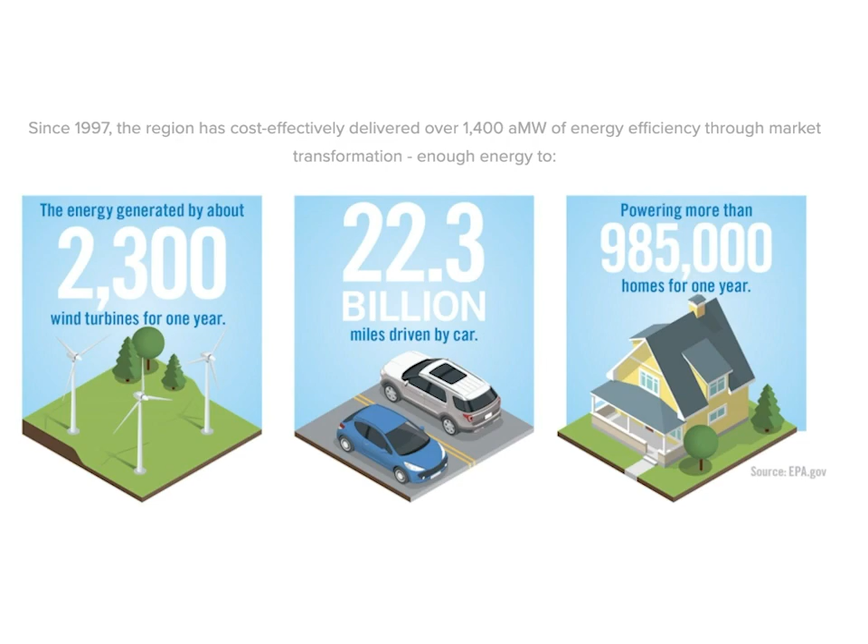Here is an overview of the course. We'll be looking at the benefits of building high-performance homes and the third-party verification when you participate in local energy efficiency programs. We'll cover the basics of building science, and then we'll dive into 10 categories of good, better, and best practices for building high-performance homes.

Towards the end, we'll show you how to explore local energy efficiency programs and potential financial incentives. And finally, we'll give you tips on implementing quality assurance procedures and techniques to help ensure your project achieves your high-performance goals.

So to cover any of the topics in great detail would require a full-day class for each and every topic. So what we'll present is a survey of the various options in the top 10 categories, and the good, better, and best spectrum of options are provided with the intention to meet all levels of experience with building high-performance homes.

And this is intended to chart a course to help you navigate some of the profound changes ahead in the construction industry. Specific information on construction details, material characteristics, and equipment selection are available by consulting your local energy rater verifier. At the end of the course, we'll provide links to additional online resources and trainings.

Our learning objectives are to identify common barriers to energy-efficient home construction, learn building science and moisture management basics, gain approaches to improve envelope design and performance, review advanced mechanical systems, lighting, and appliances, and learn how to leverage local utility programs and energy efficiency incentives.

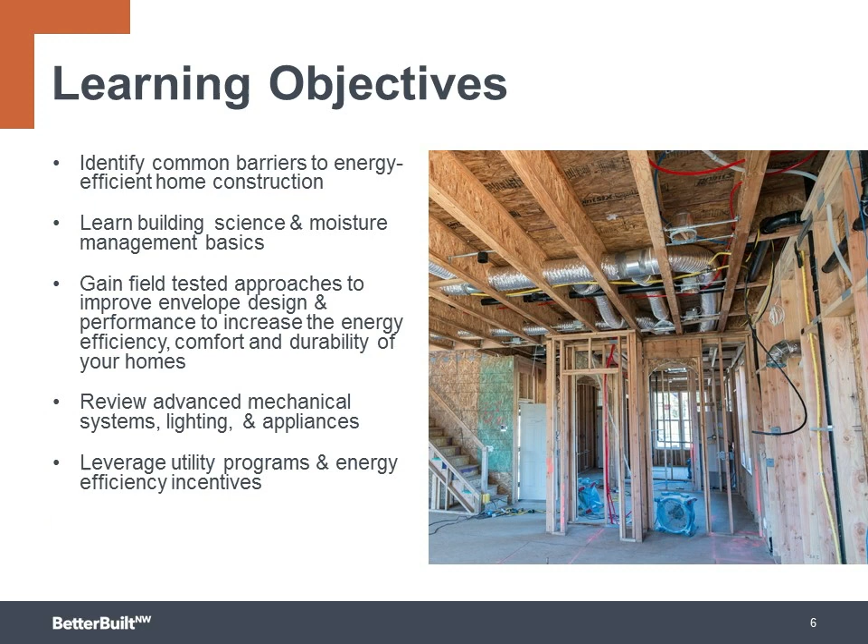Let's begin by looking at the opposite of high-performance homes, in poor-performing home scenarios, to think about why you should want to build to a high-performance level to benefit your business. What's the business case for making these changes? By taking performance to the next level, you can limit your liability and preserve your profits.

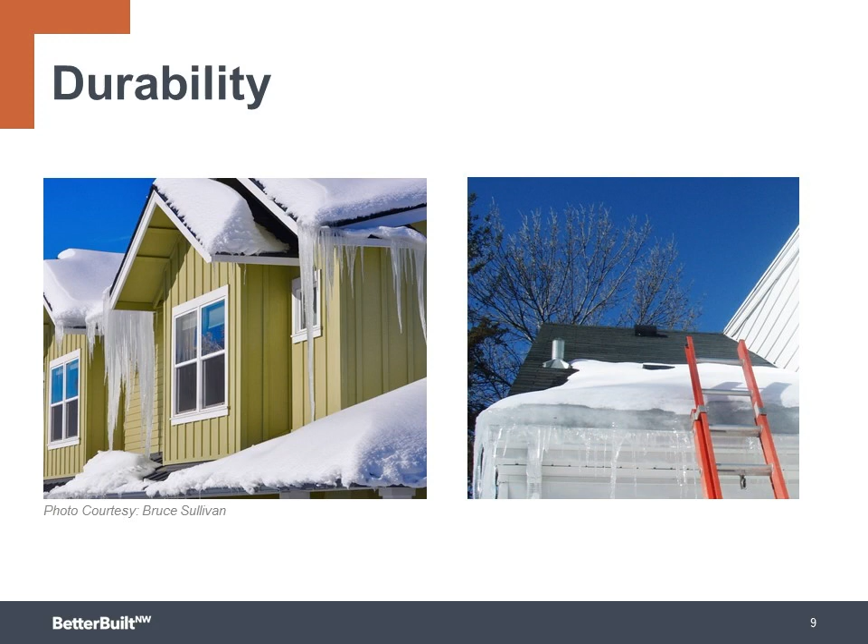Another reason to build high-performance homes is health. Unhealthy indoor air can stagnate in poor-performing homes, which may result in sick customers. Asthma rates continue to climb in the U.S. every year. Poor indoor air quality can cause this disease, and the average American spends 90% of their time indoors, and a large amount of that time is in our homes.

You want your reputation to be connected with healthy homes that provide fresh and clean indoor air. Poor performing homes can result in uncomfortable customers, and of course this will never lead to word-of-mouth referrals or positive reviews.

With today's evolved materials and building techniques, an uncomfortable home is unacceptable and totally preventable. High energy costs will also cause dissatisfaction with home buyers. Oversized HVAC equipment leads to short cycling, which can significantly lower the rated efficiency of the equipment and results in high energy bills. Why pay for this excess fuel when a well-built building shell with high levels of insulation and proper air sealing can lower the design load and allow for smaller equipment to do the job more efficiently and at a much lower cost to operate?

Housing affordability involves more than just the dollars per square foot of initial cost to build the home. When looking at the total cost of ownership, you need to consider the monthly operating cost as well, including energy bills, water and sewer bills, maintenance and upkeep, as well as location and the transportation costs of living in the home. Low-income people spend a much higher percentage of their income on energy. So lowering the energy bills to operate the home can change this equation.

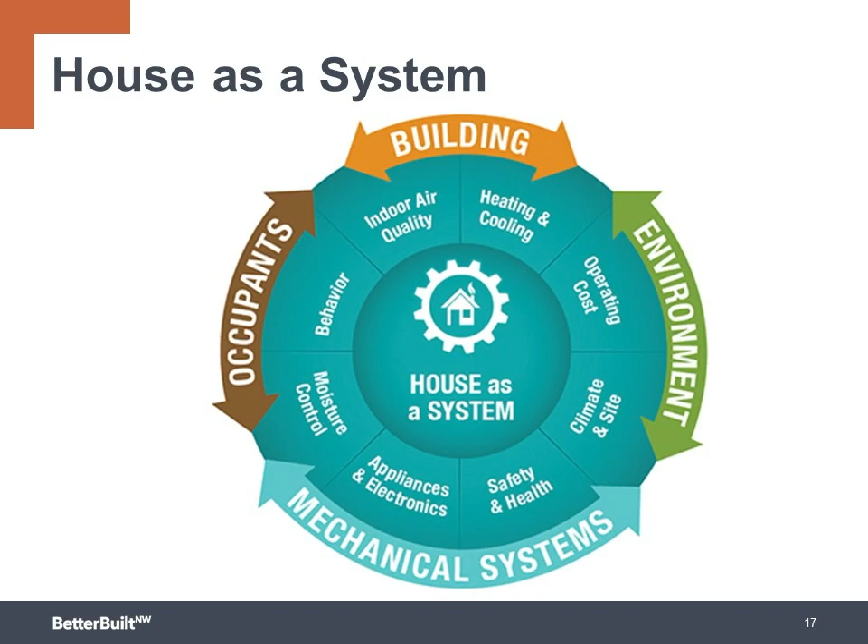Now let's look at where the market is headed, which you'll see provides more reasons to think about building high-performance homes. Buildings in the U.S. offer a big opportunity for all of us to reduce wasted energy and lower carbon emissions. Buildings use 76% of all the U.S. electricity consumed in a year and 40% of all the energy use. However, by 2030, building energy use could be cut by more than 20% using technologies known to be cost-effective today.

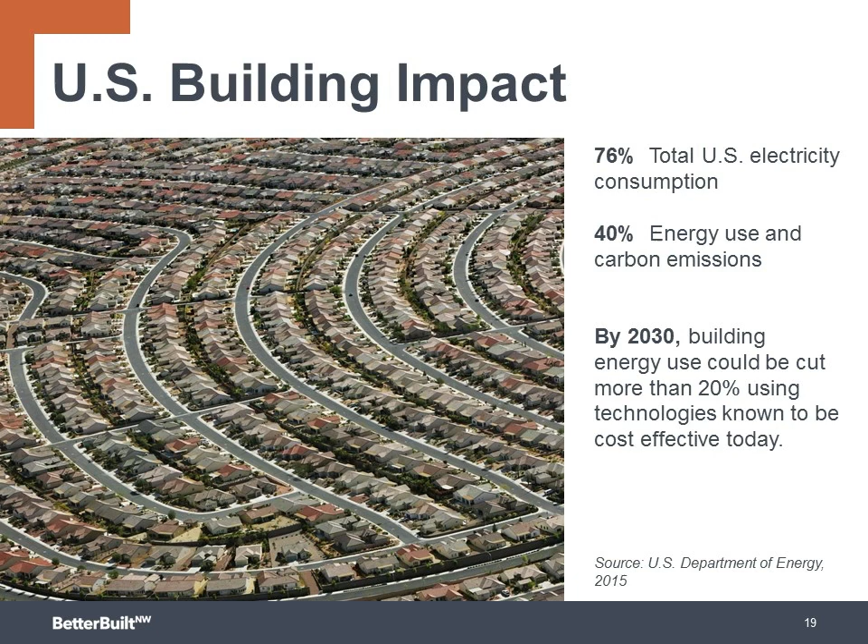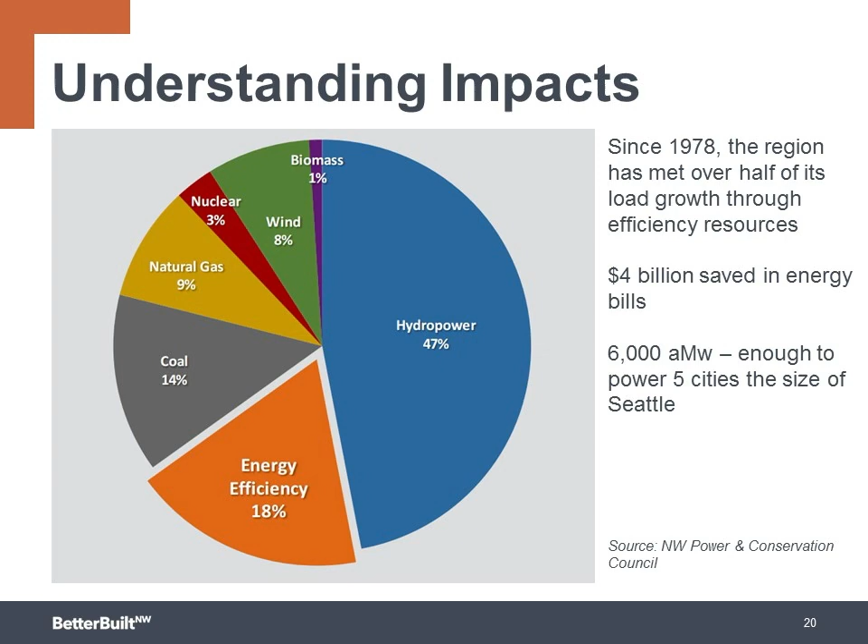Energy efficiency is also very cost-effective. The average cost to produce electricity for future load growth by saving a kilowatt with energy efficiency upgrades is less than 3 cents. Compare that to the average cost to produce electricity at around 10 cents per kilowatt hour when it's generated in a newly built coal or natural gas-fired plant. It makes sense to conserve energy for the bottom line of the utilities. Plus, if the utility companies do not have to build new power plants because we reduce the wasted energy in the system, it keeps energy costs lower for everyone.

Home buyers are identifying year after year in greater numbers as wanting energy efficiency in the homes they buy. The study asked how likely they would be willing to pay more for a high-performance home that costs more upfront but would have lower monthly utility bills, and 81% responded that they were willing to pay more for this benefit. It's also worth noting that in this example, they only focused on the dollar savings as the primary benefit, but never mentioned comfort, quality, or health, which likely would have driven these numbers even higher if these benefits were included in the stated question. And builders across the nation are responding to these buyers' expectations.

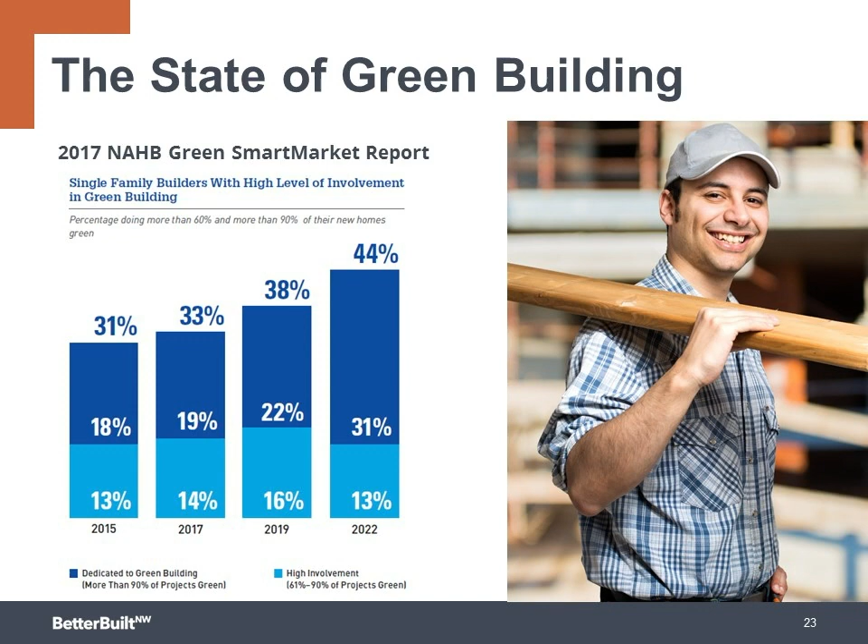In the 2017 National Association of Home Builders Green SmartMarket Report, we see steady growth of builders and remodelers who say they are incorporating green building materials and techniques into their projects. That same study also reported that the more green experience a builder has, the more they appreciate certifications, the easier they think it is to market green, and the less they perceive the incremental cost to be. 91% of dedicated green builders say customers will pay more for green homes.

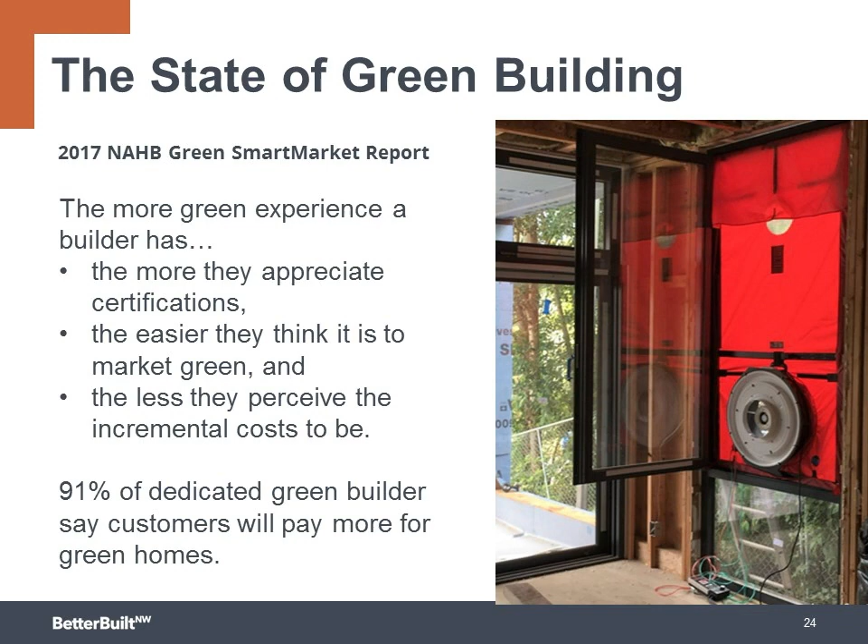The next market trend to be aware of is the zero energy home, which is a home that generates as much energy on site as it uses over the course of a year.

And these zero energy homes are being built in greater numbers across markets in the U.S. We'll look at the zero energy home in more depth in Section 10 of this training.

Policy changes are also moving the market towards high-performance buildings. In the state of Washington, the energy code cycles are evolving to require all newly constructed homes to be built zero energy by the year 2030. In Oregon, the policy changes include a goal of all newly constructed homes to be built to the US DOE Zero Energy Ready standard by the year 2023.

Additionally, the City of Portland Home Energy Score program is helping to motivate homeowners of existing homes to make cost-effective upgrades to their homes in order to achieve higher levels of performance, greater comfort, and healthier indoor air.

We're seeing the new home market moving towards higher and higher performing homes through a pull and push dynamic. As energy codes increase requirements for greater energy efficiency, they pull the market forward, whereas voluntary energy efficiency programs with cash incentives tend to push the market towards the newest, cost-effective strategies to improve energy efficiency to levels above code requirements.

We often hear that the construction industry is slow to change, and that may have been true at one time, but today's materials, equipment, markets, and just about everything is changing rapidly. Builders and tradespeople need up-to-date information and advice, and that is readily available through these types of programs.

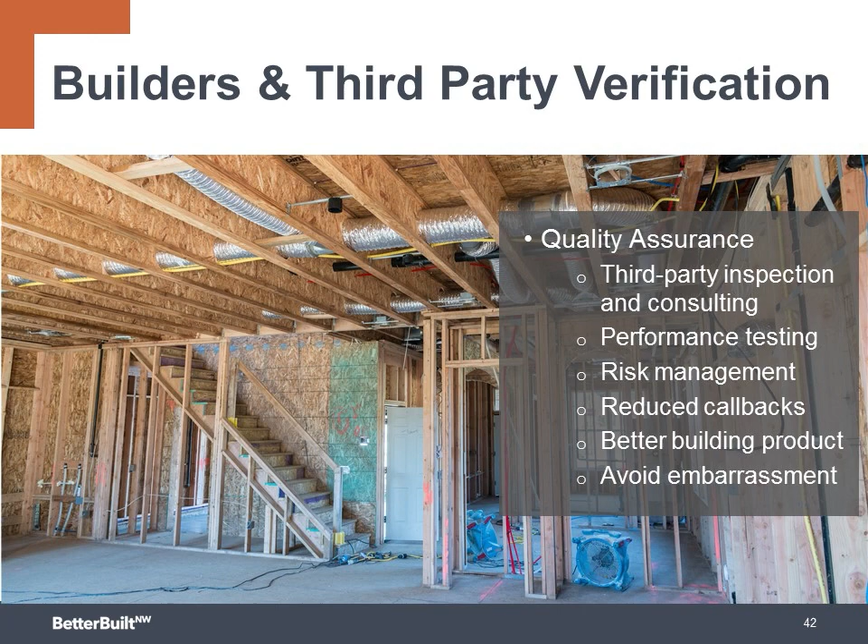Here's a short list of what the verifier does on the project. They conduct performance testing, including duct air leakage tests, building air leakage tests, and ventilation performance tests. They'll check insulation levels and quality of placement. They'll pay attention to air sealing details and durability details during construction. They'll verify ventilation operation for the whole house ventilation to ensure indoor air quality. And they'll review the HVAC system sizing documents provided by the heating contractor.

Another benefit to the builder and their sales professionals is marketing help. Green building and energy efficiency programs often provide sales and marketing collateral to help showcase the improved quality and energy efficiency of the home. Not only does this help sell the house, it also differentiates the builder's company as a leader in the marketplace.

Another example of this is in Oregon and Southwest Washington. For newly constructed homes, the Energy Trust of Oregon's EPS New Construction Program provides the Energy Performance Score to participating builders. The EPS is an energy label that can be used to make the largely invisible energy efficiency features visible when potential buyers visit the home. It shows estimated operating costs, energy use, carbon footprint, and the efficiency features built into the home. EPS is just like a car's miles per gallon rating, but for the home.

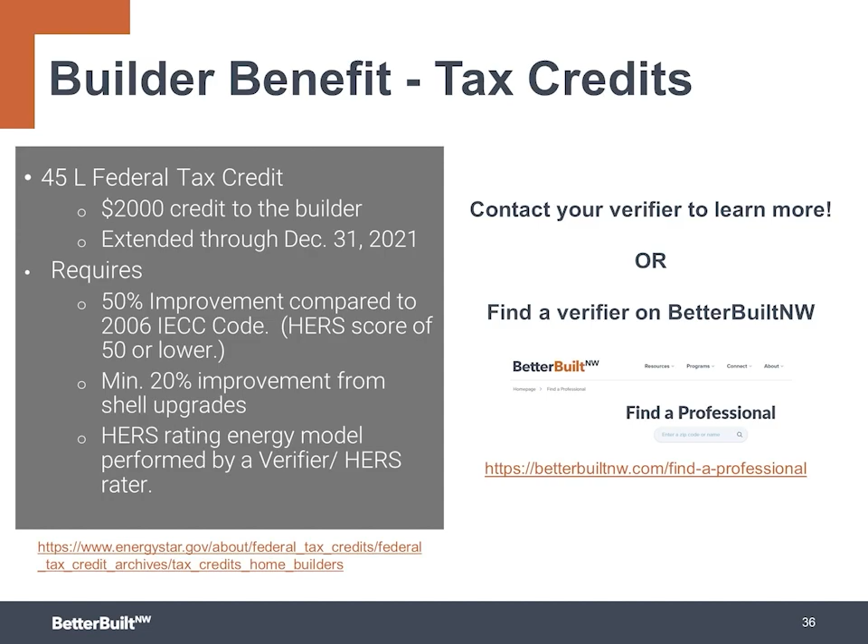In this next section, we're going to cover the building science fundamentals that govern the natural forces acting upon the home. These are the forces we want to control wherever possible in order to build a high-performance home.

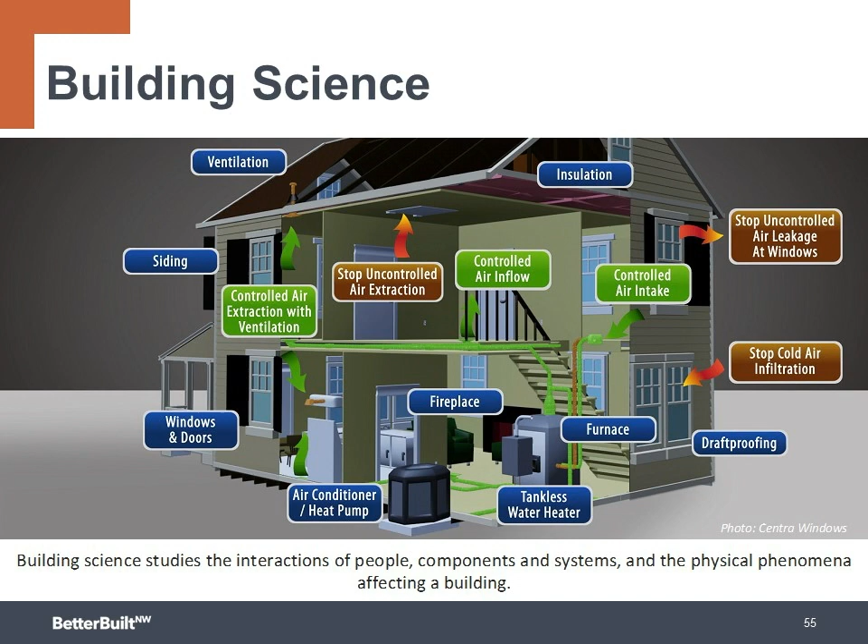So what is building science? Building science studies the interactions of people living in the structure, the components of the structure and the systems within it, and the physical phenomenon affecting the building. The laws of nature govern how heat, air, and moisture move around and through the structure. By gaining a working knowledge of these laws, we can build in better control mechanisms to manage the heat, air, and moisture movement. Let's start with the physical phenomenon that the house is experiencing.

Pressure differentials, temperature, humidity, air movement within the structure, and how all these forces affect the building and the occupants. It sounds much like the 6 o'clock weather report. Today we can expect a high of 68 with lows around 60. There'll be high pressure dominating around the ceiling with lower pressures near the foundation zones. High local relative humidity levels are approaching 50%.

There are two laws of thermodynamics that govern most of these forces, which can be restated in a very easy to understand set of basic principles. If you can remember these basic principles, you've got it. The two laws of thermodynamics in a nutshell. Apply these principles to any situation involving energy, air, or moisture movement in a building, and you should be able to predict the direction of that movement.

The first basic principle is warm moves to cold, or another way to put it is heat chases cold. This is from the first law of thermodynamics. Energy in the form of heat will always move from a warmer mass to a colder mass.

Next is more moves to less, from the second law of thermodynamics. Typically in a building, this is seen in concentration of molecules. For example, moist air with more vapor molecules will move towards drier air if given the opportunity. Of course, this has implications for how we manage moisture in the form of vapor.

Next is high moves to low. Air pressures will always move from an area of high pressure to an area of low pressure. This affects how air and moisture move through the structure.

Then there's another scientific law that we must pay attention to, Newton's law of universal gravitation. Gravity moves everything down and is key for proper moisture management of bulk water to keep it away from the wooden structural elements of the building.

So what is the one thing in common with all of these principles? The answer is movement. These laws all describe movement, and it is this movement that we focus on with building science.

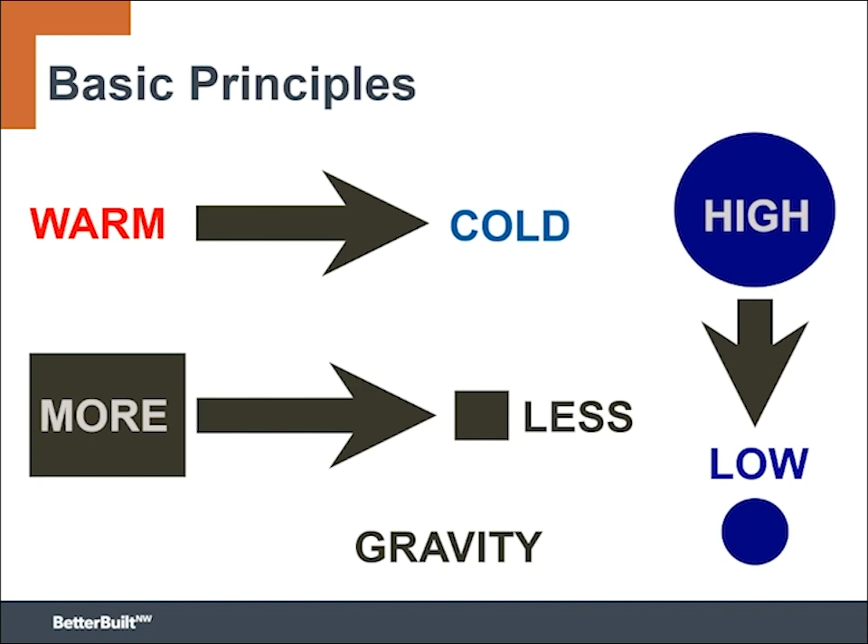Any questions on the basic principles? If not, class is dismissed. Just kidding. So let's get into some of that movement and begin with moisture flows.

Water really is amazing. It has three properties that give it unique characteristics: cohesion, adhesion, and surface tension. Cohesion is where water is attracted to water. Cohesion happens because of the 104-degree angle of the hydrogen and oxygen atoms, which polarizes the molecule and makes it very cohesive or sticky. It acts much like a magnet does with a positive and a negative side. The cohesive forces between liquid molecules are responsible for the phenomena known as surface tension. It's because of surface tension that some bugs can walk on water.

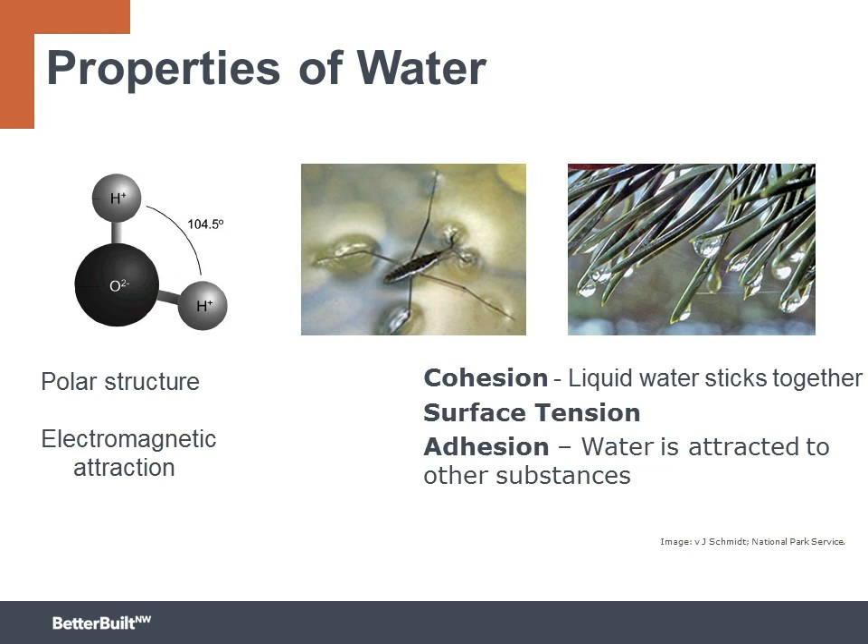Adhesion is where water is attracted to other substances. This adhesion is something to pay close attention to as we design and build systems to keep water running off and away from the building. Flashing with a drip edge is an example of a product designed to prevent water adhesion from wetting the outside of our buildings. Kick-out flashing, which is designed to direct roof runoff away from a sidewall and direct it into the gutter, is another good example. What are the ways that moisture can flow?

Liquid water can move by gravity, but it can also move by pressure differences, the high moving to low. Liquid water can move by capillary action, and that's the ability of liquid to flow against gravity, where liquid can spontaneously rise in a narrow space like a thin tube, or in porous materials such as paper, or in a building through concrete.

Water as a vapor generally moves in two different ways. Water vapor is either transported through air movement, or it can diffuse through solid materials, molecule by molecule, through the pores of that material.

We need to keep our structures dry to prevent decay. Wood-destroying insects and organisms need all three of these conditions in order to thrive and damage the building: temperature needs to be warm, there needs to be available food, and there needs to be available moisture. If we take away one of these conditions, they will not be able to take up residence and cause decay.

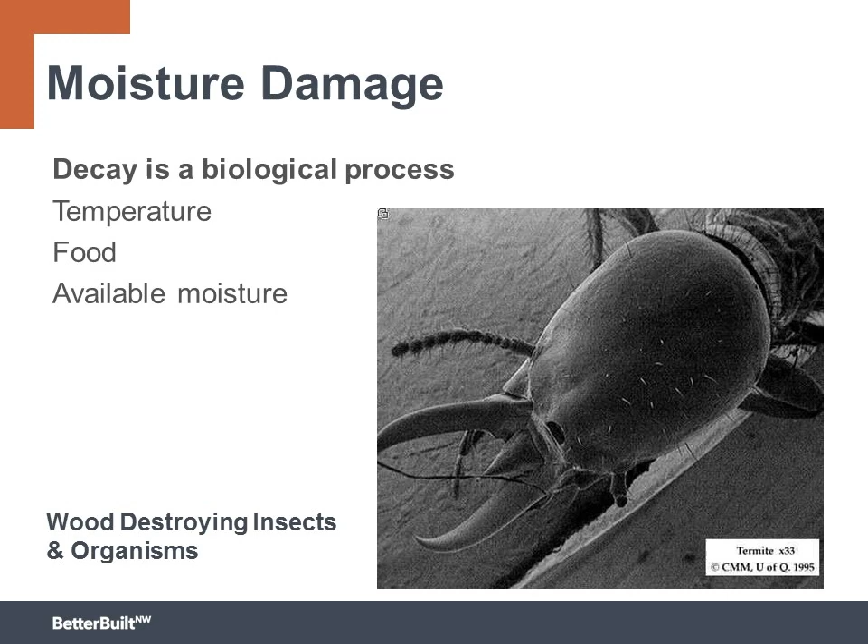Temperature varies considerably, plus we humans like to be warm, so that one's not the best choice. Food is what most of our buildings are made of. Wood is our structure, but to the decay organisms, that's dinner. So that leaves moisture as the best candidate for effective regulation, and why we spend so much of our effort to keep our buildings dry.

So how much water is too much when we want to prevent decay? Fiber saturation is the level of moisture content where the cell walls of the wood are holding as much water as they can. Water held in the cell walls is called bound water, while water held in the cell cavities is called free water, and as the name implies, the free water is relatively accessible as a source of water for decay. So decay can generally only get started if the moisture content of the wood is above the fiber saturation point of 28% moisture content by weight.

Wood does have a buffering ability where it can absorb and store moisture, then release it during dry periods without harm to the wood, as long as the wood does not reach the 28% saturation rate and remain saturated for long periods, creating conditions for insects, mold, or fungus to begin decay.

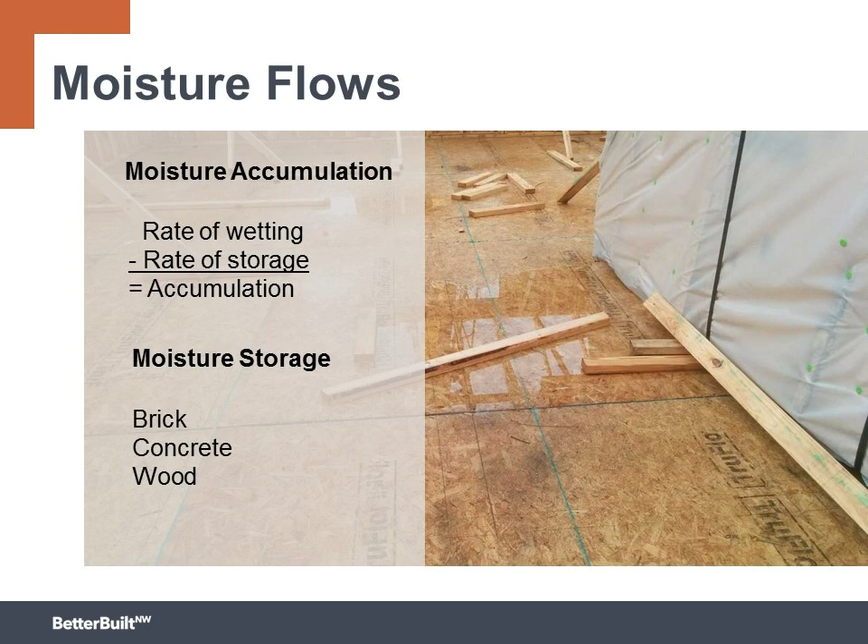So building structures that allow for drying is crucial to long-term durability. That water storage capacity of wood, acting as a buffer for short periods of time, can add up to be quite a bit of water. A 2,000 square foot wood-framed house can store and release up to about 50 pounds of water.

You can use a pin-type moisture meter to measure the wood moisture content at the time of construction. It's important to measure the structural framing prior to insulation and sheetrock, and we want the moisture levels to be optimally below 19% before cover. All builders should own one of these and use them on every building prior to cover. Not only is it best practice, it's required by the Oregon Residential Specialty Code for those building in Oregon.

For bulk water management, we use the WRB, or weather resistive barrier, under the siding to keep the walls dry if wind-driven rain or snow hits the walls and migrates behind the siding.

To take that protection to the next level, many builders are adding a rain screen detail behind the siding. By installing furring strips between the WRB and the siding, a drainage gap allows for any wind-driven water that penetrates the siding to drain quickly down and away from the wall.

Another way to build a rain screen is to use a WRB product that has the offset built in, with dimples, mesh, ribs, or something similar to create the drainage channels.

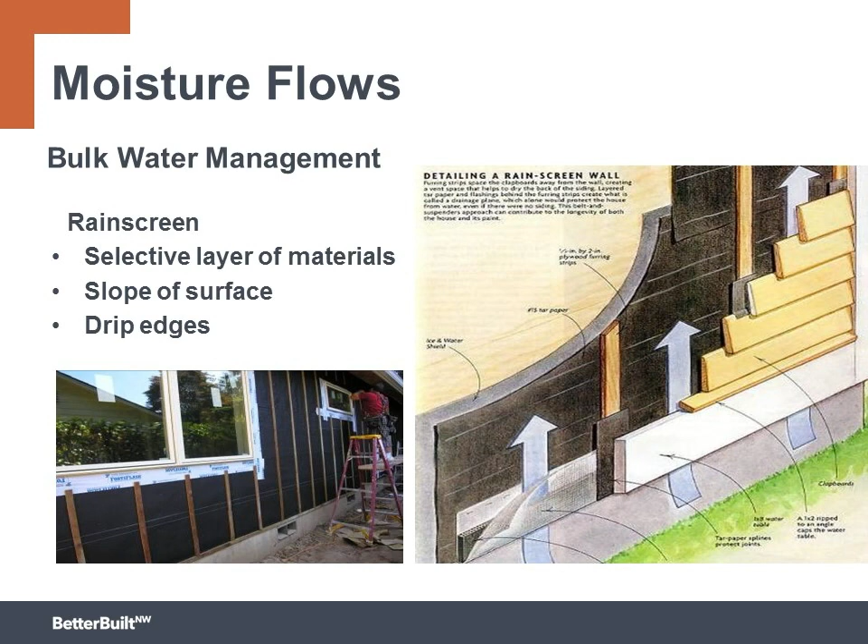With the addition of a ventilation gap at the top of the rain screen cavity, you can make a ventilated rain screen. This gives a secondary level of drying potential because now air can flow up through the rain screen gap and dry out moisture even faster. This detail can help the interior section of the walls dry faster if any moisture penetrates the wall in the future.

Then there's the capillary action we need to guard against, which again is water molecules moving through porous materials. This moisture flow is powerful and can even defy gravity to move water upward, and this is why capillary breaks are required between concrete and wood. Without this detail, moisture could wick up from the concrete into the wood and cause decay if the soil in the location is wet.

When it comes to water in its vapor state, we need to guard against the two ways it can move: by diffusion or by air movement, also known as convection. By diffusion, vapor molecules can travel alone, and vapor will diffuse through permeable materials, passing molecule by molecule through the pores of the material.

As we choose materials that make up the layers of our building assemblies, we need to understand the permeability of those materials. The perm ratings will tell us if the material is impermeable, semi-impermeable, semi-permeable, or permeable, as we can see in this table.

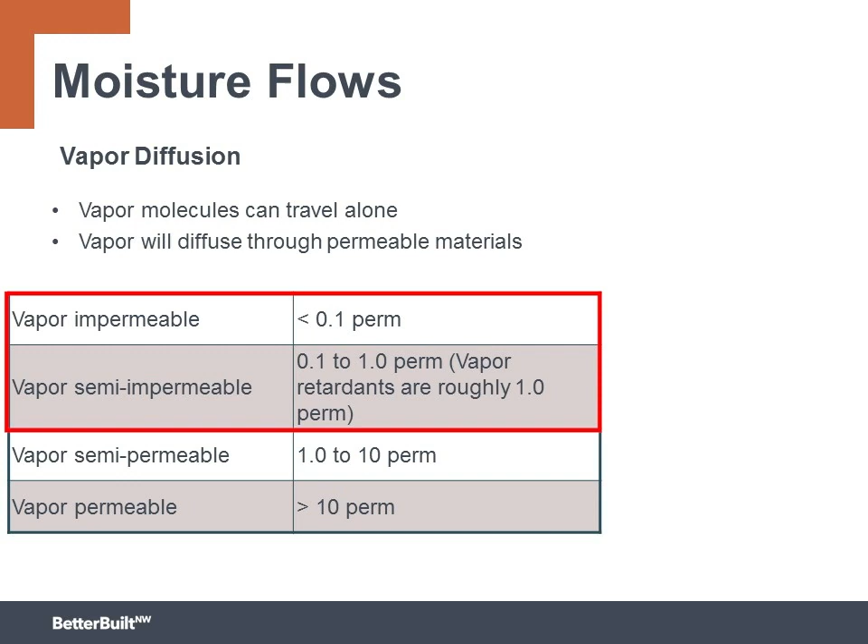Vapor retarders, installed on or just inside the interior layer, usually fall into the impermeable or semi-impermeable category, depending on the climate zone. The vapor retarder is used to guard against vapor diffusion of moist indoor air to keep it out of the wall cavity.

However, when we start choosing materials to be installed on the exterior of the building, it's best practice to choose a semi-permeable or permeable material in order to provide drying potential to the outside. This can safeguard the wall assembly in the future in case any vapor does enter the wall from diffusion, air leakage, or if you have a bulk water leak at a window or something like that.

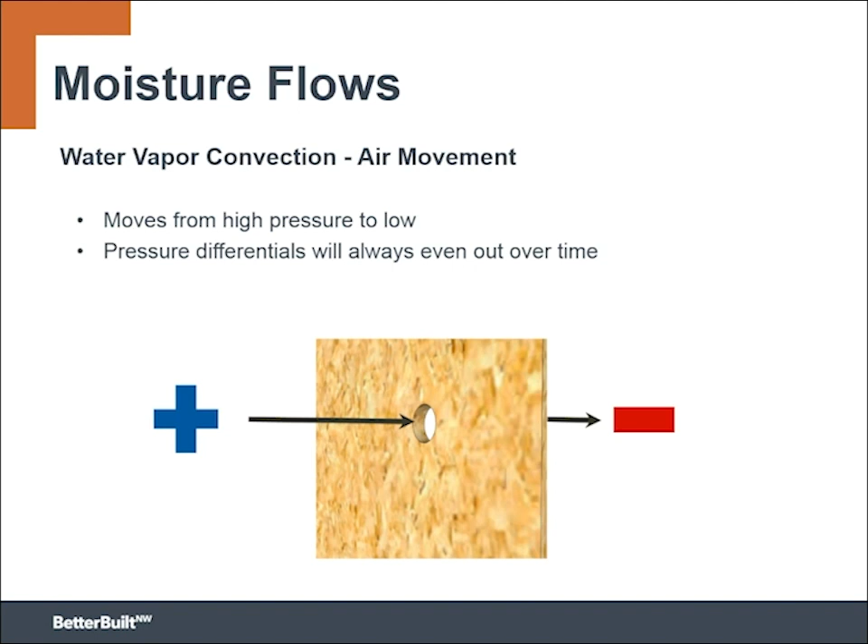We also need to guard against water vapor convection. That is vapor moving along with air molecules, which will flow from areas of high pressure to low pressure, one of our basic principles. The pressure differentials will always even out over time, and that is because water vapor can hitch a ride along with the air molecules moving from high to low through pathways like cracks, gaps, or holes in the air barrier. So air sealing the building shell helps increase energy efficiency, but it also protects the building structure from potential moisture damage.

So clearly we need to protect the building from both vapor diffusion and vapor convection. Which of these two forces poses the greater threat?

Well, a leading building science expert, Building Science Corporation, conducted a lab experiment to measure the amount of moisture that could penetrate a wall over the course of one heating season. They ran two simulations, one for diffusion and another by convection. For the first, they used a full 4x8 piece of sheetrock and subjected it to simulated conditions that you would find in a typical home of 70 degrees Fahrenheit and 40% relative humidity levels.

After the heating season, they measured about 1/3 of a quart of water had migrated through the sheetrock to the interior cavity of the wall. So diffusion can add up some water content over time.

The second wall test again used a full 4x8 piece of sheetrock, subjected to the same 70 degrees and 40% relative humidity conditions. But this one had a 1 square inch hole through the sheetrock and positive air pressure that can be found in houses, conditions that would cause air leakage through that hole.

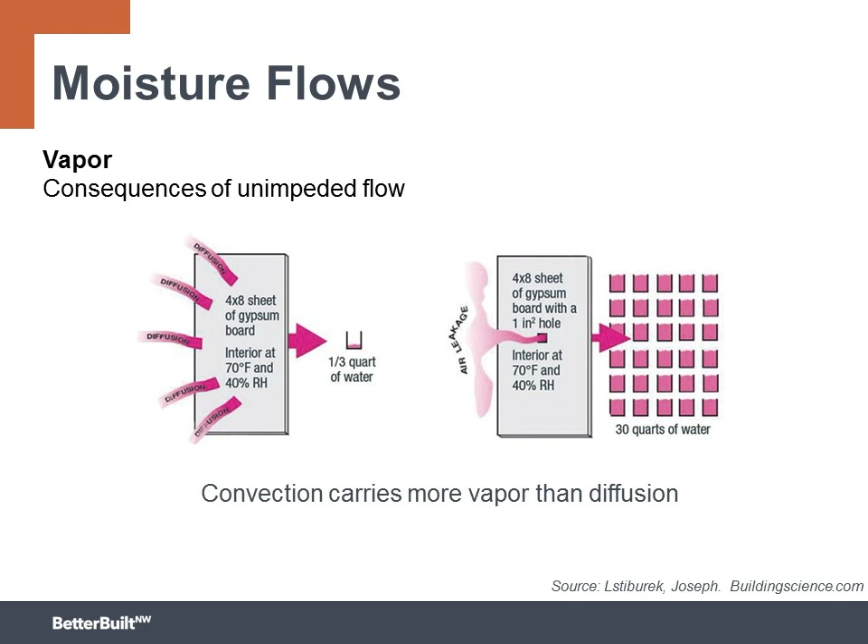What they found after one heating season with air leakage was the amount of water that migrated into the wall was 90 times greater, with 30 quarts or 7.5 gallons of water that was able to enter the wall. So air leakage is a far greater threat to the long-term durability of the structure, and air sealing is key to safeguarding the wood in our building assemblies.

So next up is our vapor quiz. What is lighter, dry air or humid air?

We'll have a look out the window up to the sky, and the clouds we see show us that moist, humid air is actually lighter than dry air. It kind of seems to defy common sense, but the reason that happens is air in our atmosphere is 78% nitrogen and 21% oxygen, and nitrogen is quite heavy at the atomic level, especially compared to a water molecule. Nitrogen is at 28 atomic units and a water molecule is 18. So as the lighter vapor molecules enter the air, they rise to the top and they displace the heavier, drier air with all of that nitrogen, and that sinks.

So what are the implications in our structures? Holes in the air barrier up high are going to be more vulnerable to vapor convection. Think, for example, recessed can lights in a kitchen cathedral ceiling. You don't want air leakage happening there. There's going to be moisture in the air from the cooking activities, and there's going to be a driving force up at the ceiling plane, and that's likely to enter into the building assembly and cause damage. So you don't want air leakage anywhere in the structure, but you really don't want it high in the structure.

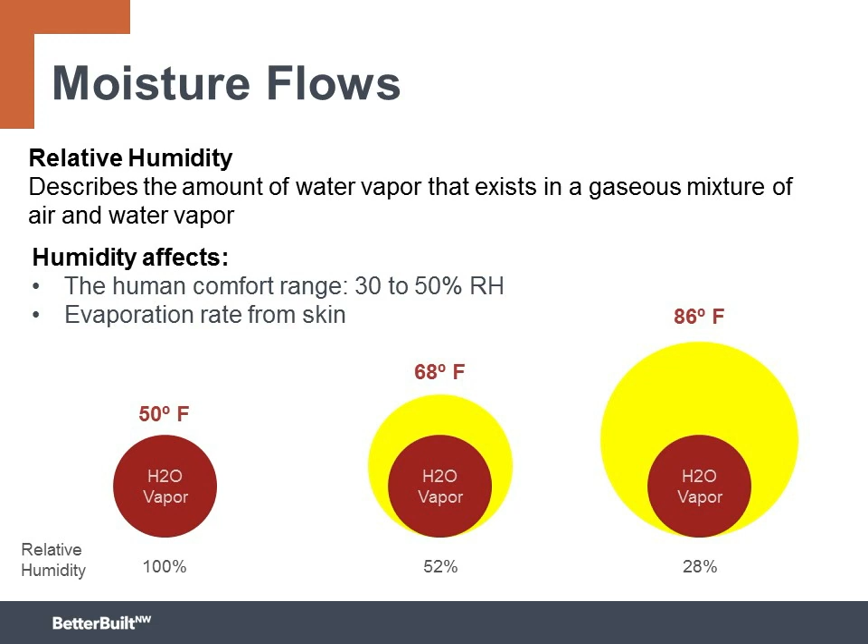The optimum relative humidity that we'd like to keep our homes at is between 30 and 50%, and this is where we find it most comfortable and healthy. Above 50 or 60%, we can start seeing condensation in cold places that usually gets noticed when mildew or mold starts growing.

As we wrap up the building science section on moisture flows, we have seen there are many ways water can cause problems for our structures, but the solutions for controlling the moisture are available. We simply need to choose the right materials and install them correctly to safeguard the structure and build a high-performing house. We also need to make sure to use materials that allow the building to dry out when conditions provide drying potential.

In this section, we're going to look at heat and energy flow, as well as insulation strategies for managing this movement. As we begin to talk about managing energy in the building shell, we can start by looking briefly at the first and second law of thermodynamics.

These laws govern how energy moves throughout the building, as well as into and out of the building, depending on the season. Remember, these laws are the basis for our basic principles: warm moves to cold, more moves to less, and high moves to low.

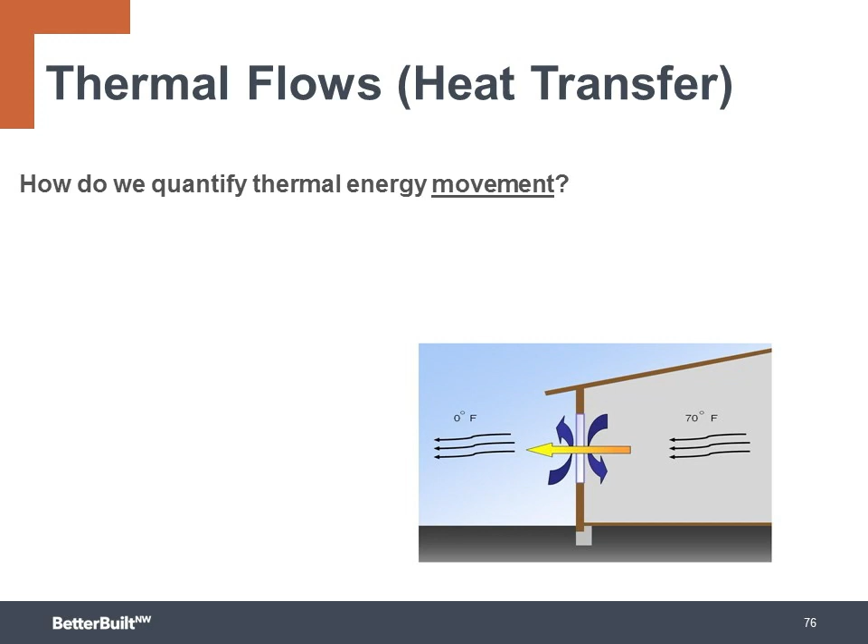Calculating heat transfer through the building shell is a fairly straightforward formula. Heating contractors perform this calculation whenever they do a heat load calc on a building using ACCA Manual J. To do this, we need to know how fast the energy will flow through an assembly. This rate of heat transfer is called thermal transmittance, expressed mathematically as a U factor.

The most common place to have seen a U factor is on a window sticker. U factors of windows tell us how fast heat transfers through the window and its frame. So we can use the overall U values of the building enclosure to determine how fast energy will transfer through it. The way to do that is to multiply the U factor by the area of the building shell and the difference in temperature outside and inside the conditioned space.

The result of this equation is the heating load. If we want to calculate the heat loss, we simply multiply the heating load by time elapsed. The important thing to remember about the U factor is that it's telling us about heat movement - it's energy in motion. In order to slow down that heat loss or gain, we need to use a barrier to interrupt the energy movement.

Insulation is how we do that. The ratings of insulation products, expressed with R values, tell us how well the insulation slows down the energy movement. R stands for resistance to heat flow, the opposite of the U factor, both in our buildings and mathematically. The R value is 1 divided by the U factor.

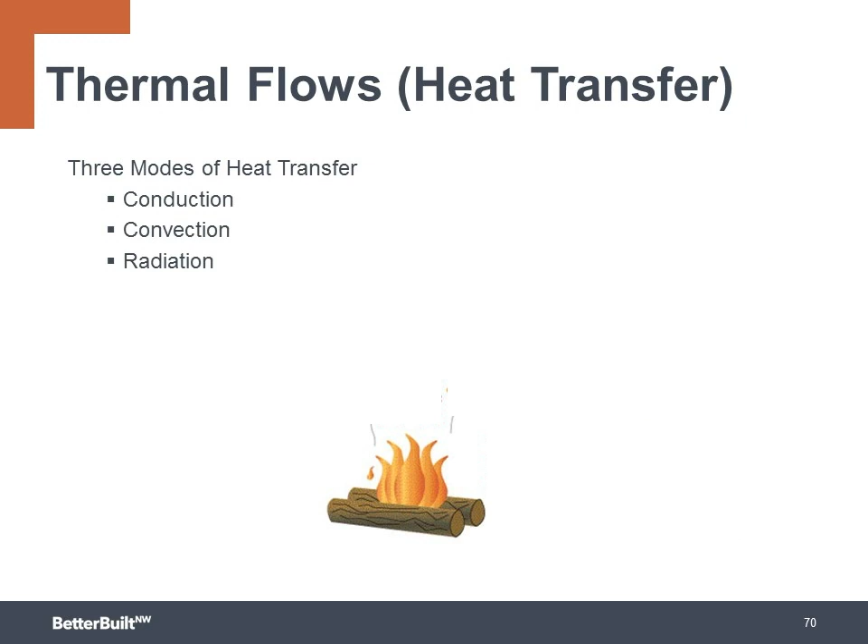There are 3 modes of heat transfer: conduction, convection, and radiation. Conduction is when heat is applied to a solid material, then it moves through that material to the colder parts of the material.

Convection is heat moving with the help of other molecules, which can either be a gas or a liquid. And we're quite familiar with convective heat flow using a gas, and that's with air molecules. The heat warms the air particles, and then they rise when there's no other outside force to move them. And this is why most people think heat always rises, but it's not always true. Heat can move sideways or down. It's actually warm air that rises.

We can see this demonstrated really well in a 2-story home where the second floor can get uncomfortably hot in the summer months. Radiation is heat moving electromagnetically with invisible waves of energy. Sitting in front of a fire, like in this example, we can feel the heat radiating sideways to our hands. And it works by line of sight too.

When it strikes an object, there's a shadow behind the object, and most of the heat energy is absorbed by the object that's getting the radiation. Think of when you're at a campfire on a cold night, and you're warm in front, but your backside continues to get colder and colder, and eventually you need to rotate yourself to try to even out your comfort.

So let's look at each mechanism of thermal flow in more depth, starting with conduction. Thermal conduction is the movement of heat through a solid material. When the solid is exposed to a heat source, the molecules are activated or excited by the heat and then transfer that kinetic energy to the adjacent molecules. It continues like this with a domino effect through the material until it reaches the cold side, or what's labeled heat sink in this animation, and the heat will then radiate away.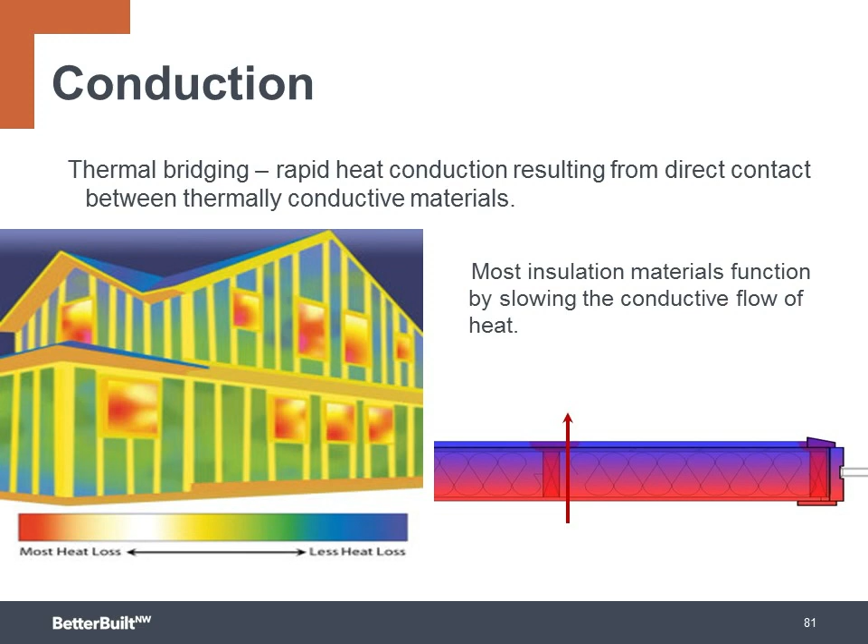So to build a higher performing home, we need to minimize these thermal conductors that span from the inside conditioned space to the outdoors. Thermal bridging is a term you may have heard that describes this conductive heat transfer in a building.

Radiation is energy moving as invisible electromagnetic waves. The energy is emitted nearly at the speed of light from a heat source. It moves in all directions until it hits an object, which then absorbs the heat. The object also creates a radiant shadow behind it. Radiation can work to our benefit for heating systems like radiant floor heat. But it can also cause some heat loss if we have open gaps in the insulation within our building assemblies.

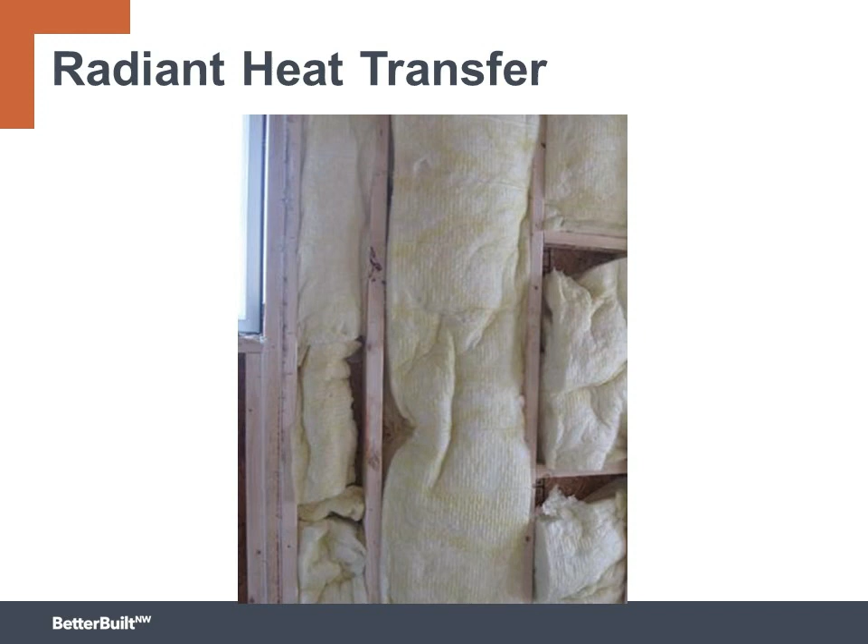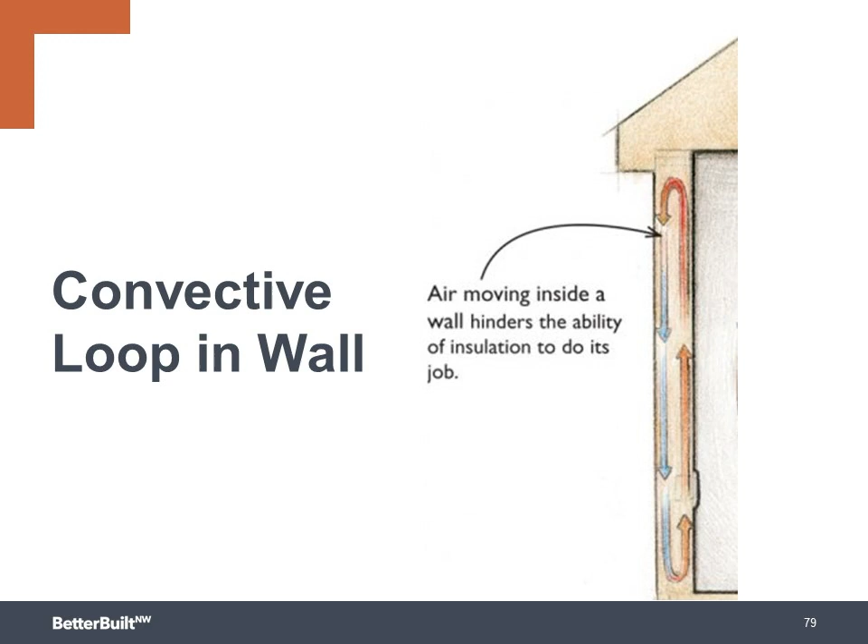Convection is the transfer of heat by moving gases or fluids. In a home, of course, this gas is going to be air. It can act like a conveyor belt to move heat from a warm source to a cold heat sink. When this happens inside of a wall cavity, it will move heat out of the conditioned space in the winter and heat into the conditioned space in the summer, wasting energy for decades. And being inside of a wall, it's very unlikely that anyone will notice that air movement.

So how do different building materials stack up for R value? Here's a list of insulating R values per inch. And remember, R stands for resistance to heat flow, the opposite of the U value, the speed of the heat flow. So still air has an R value of 6. And we often talk about creating a dead air space in the building cavity for insulation. And this is why air is a great insulator.

Of course, air that's not moving has a high R value per inch. Some foams achieve an even higher R value by trapping special insulating gases inside the foam as bubbles. Fiberglass and cellulose achieve respectable R values if they're installed correctly to ensure there's no gaps and air is not moving through them. Again, we see wood has an R value of 1 per inch, but it's a fraction of what all the insulation materials can achieve. Concrete and soil have virtually the same low R value. And finally, we see steel with the least amount of resistance to heat flow.

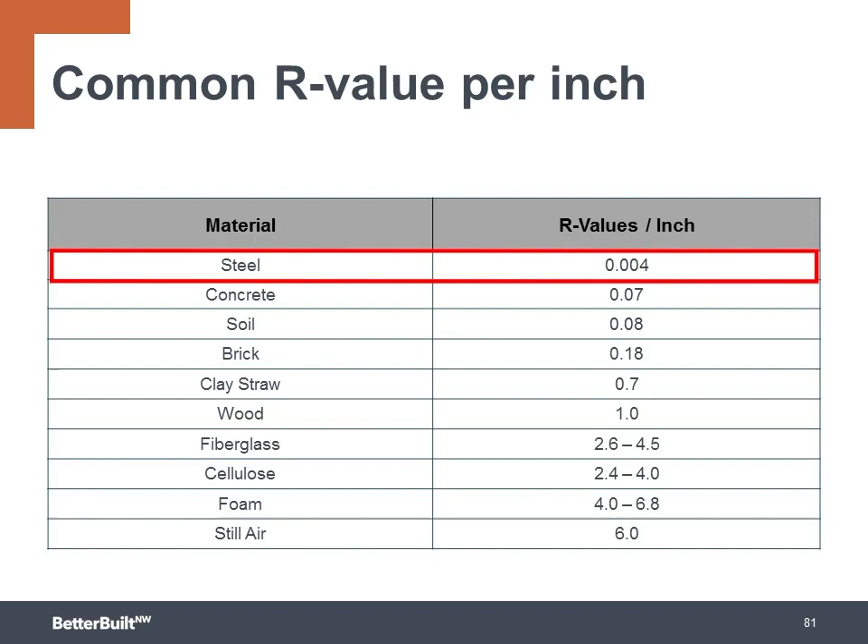So let's get into the different types of insulation. The fiber-based materials we use for insulation are fiberglass, of course, cellulose, rock wool or mineral wool, and less typical but viable is cotton insulation or wool insulation. And the fiber insulation products can be installed a number of ways depending on the product, from loose fill blown in, batts and blankets, blown-in systems like BIBS, Spider, or dense pack, and open cavity spray.

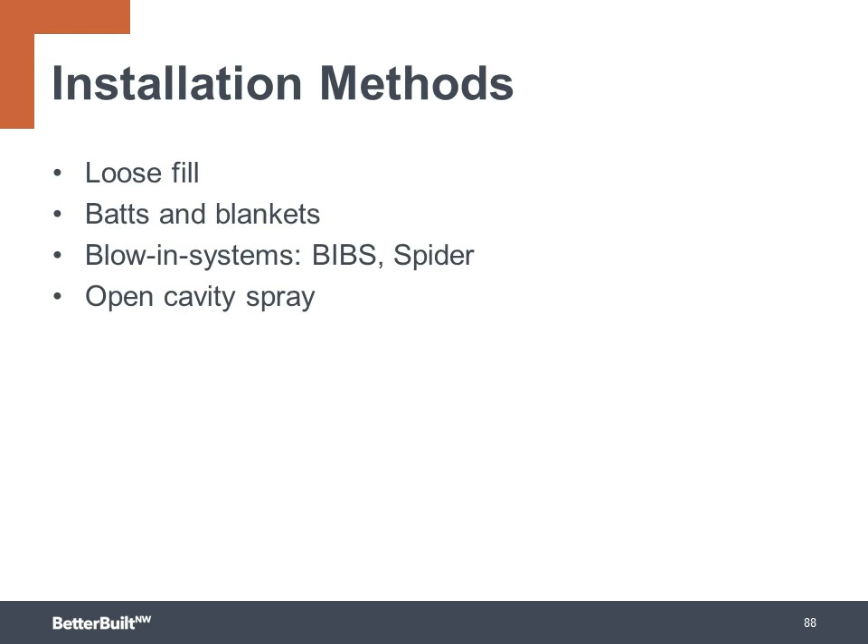And by far the most challenging type of insulation to install correctly is the batts or blankets. They must be custom cut and fit around all the services installed in the wall, like the electrical and plumbing. And then varying stud bay sizes also require a custom cut. It's rarely done to the same quality install that you can get with one of the spray-in or blow-in materials.

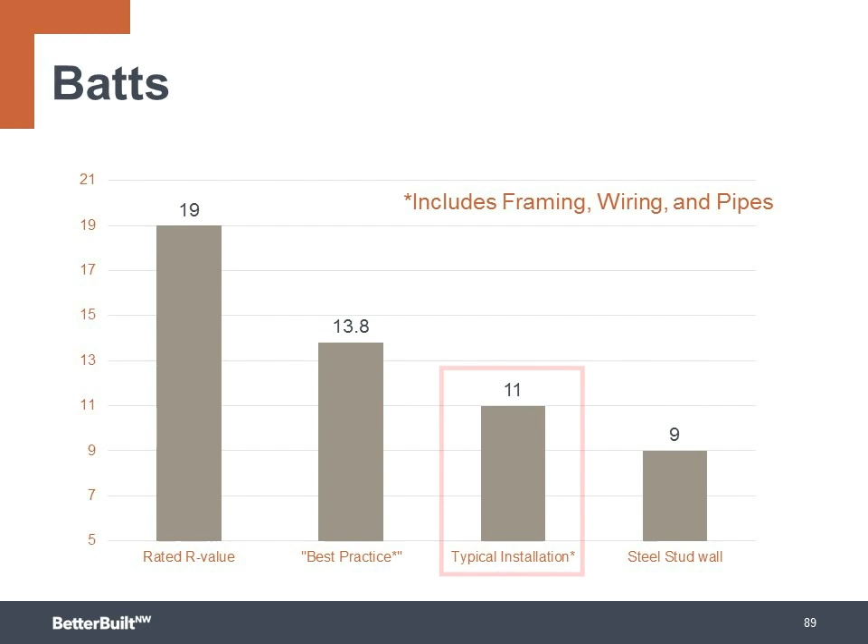So why are those imperfections in batt insulation so bad? Well, the gaps and spaces dominate the heat loss. No matter how much insulation you pile up next to a gap, the heat loss through the gap is not reduced at all. And the larger your initial R value is, the greater the effect it will have on lowering the R value of the building assembly. In this chart, you can see the effect on walls insulated with batt insulation. The rated R value of the insulation is severely degraded when the batts are installed poorly. And unfortunately, this is the quality of a typical installation.

So here's an example to show us how a small area can have a huge impact on the overall performance of a building assembly. You can crunch numbers through a formula called a weighted area average to see this. So imagine we have a 1,000 square foot attic insulated to R38 and 5 square feet insulated only to R1. And this 5 square feet is the attic hatch, because the batt sitting on the back of the attic hatch was tossed aside and not put back in place. How is the heat loss through that hatch affecting the overall R value of the entire R38 attic? After all, 99.5% of the attic is still insulated. When you run the numbers, it shows the attic is now performing as if it only had R32 insulation, just because someone forgot to put the batt back in place.

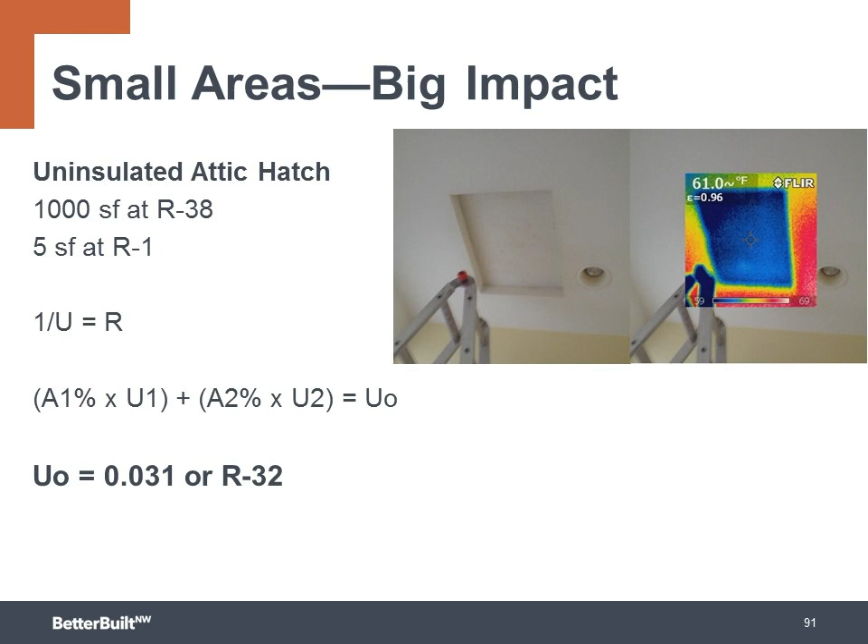So this illustrates that a wall with a lot of little gaps in the batt insulation could have its R value degraded severely. So if you are committed to using batt insulation, it's crucial that it is installed as perfectly as possible, and that means contact with all 6 sides of the stud bay. It should fill the entire cavity without any gaps or voids, and without compression from being stuffed behind objects in the stud bay, which compresses the insulation and also degrades its R value.

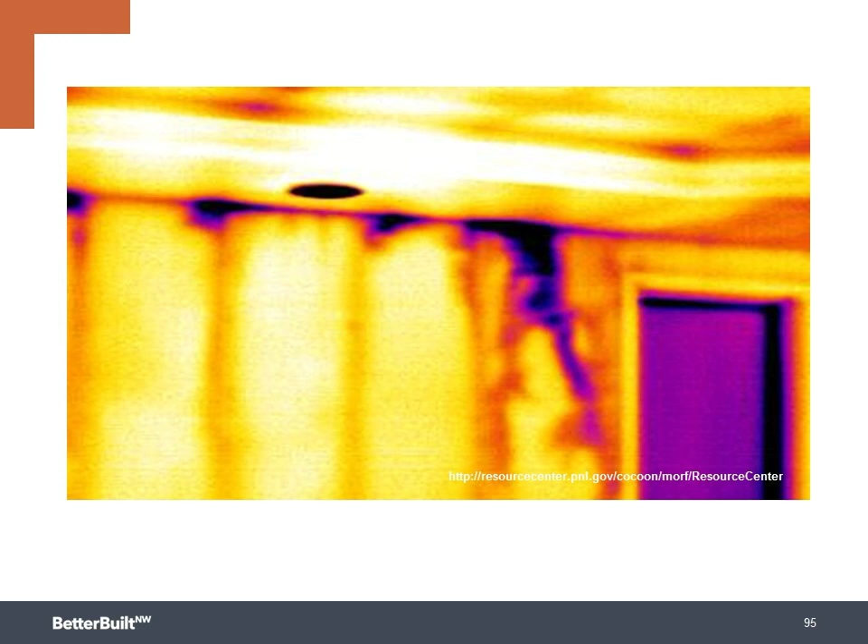Unfortunately, it's often installed like this: not cut precisely around boxes, plumbing, or other objects, compressed behind wires, and gaps that provide line-of-sight pathways from the warm sheetrock to the cold exterior sheathing. Here's another IR photo that shows heat loss because a batt was compressed behind a wire and cold air is leaking through that void, creating a very cold area across the wall.

So the easiest way to overcome these challenges is to move over to a different type of insulation. Blown-in wall insulation is an awesome choice. It prevents these voids by flowing around all the objects in the wall during installation and creates a high-quality assembly that performs to its rated R value. It can also reduce air movement by filling the entire cavity so that the insulation is in contact with all 6 sides.

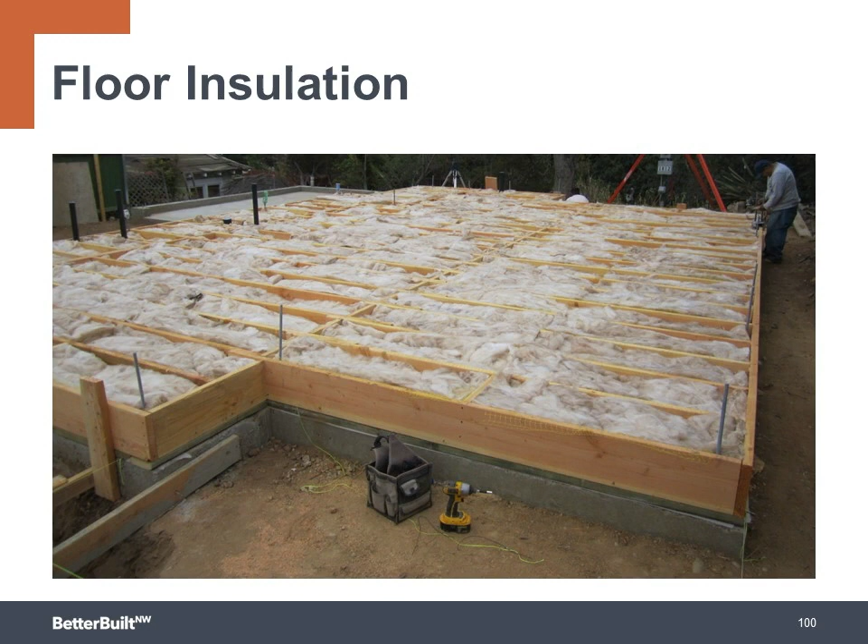Floor insulation is typically done with fiberglass batts and often suffers from the same defects found in walls, with voids and gaps. Some builders are having their floors blown when there is adequate height access, but typically batts are still the go-to for most projects.

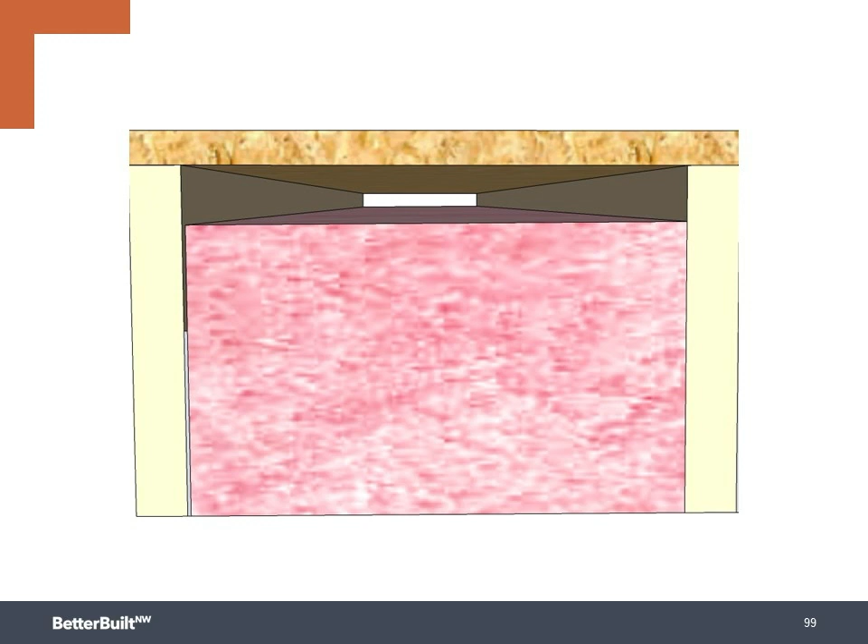It's key to make sure the insulators do not build in compressions, gaps, or sagging floor insulation. It needs to touch the bottom of the subfloor to be effective. So when installing the support for the batt insulation, it must be done so that the batt is making contact. Otherwise, cold air can flow between the subfloor and the top of the batt, hanging too low. This can effectively degrade the floor insulation to an R0 in a worst-case scenario.

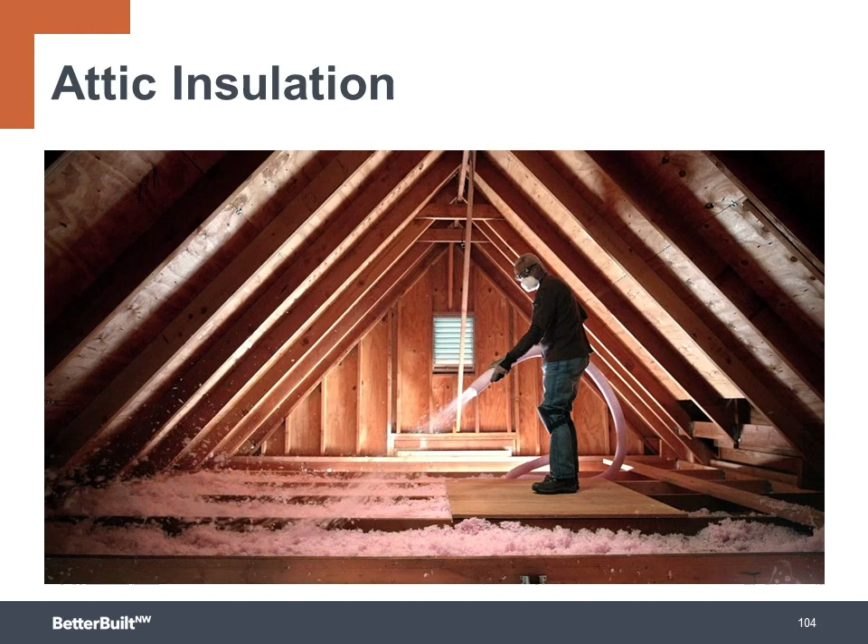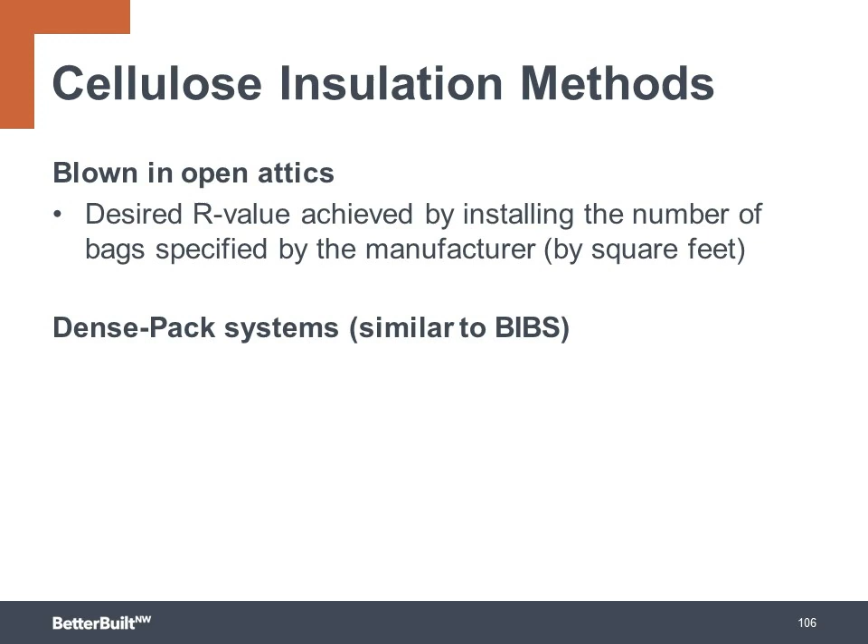Now let's look at exterior insulations. By adding a layer of continuous, rigid exterior insulation, you can increase the R value of the wall significantly. The insulation itself adds more R value over the cavity, but the other big improvement is that it insulates the framing studs, plates, and headers, essentially putting a barrier or break in the thermal bridge to stop that rapid heat movement by conductive transfer through the wood.

There are many types of foam board insulation and mineral wool insulation that can do the job. The rigid insulation types vary in their R value per inch, as well as their permeability, their ability to allow for drying. It's important to consider both of these characteristics in your wall design so that you build an energy-efficient wall that also has good drying potential for long-lasting durability.

Spray foam is another insulation option, and it has many benefits. It provides excellent air sealing, as well as an excellent fit. It flows around all the obstacles in the walls. Even if there are small voids, it's not a problem, as the whole cavity is air sealed. It provides high R values per inch, depending on the density of the foam, and the vapor transmission or the permeability also depends on the density of the foam.

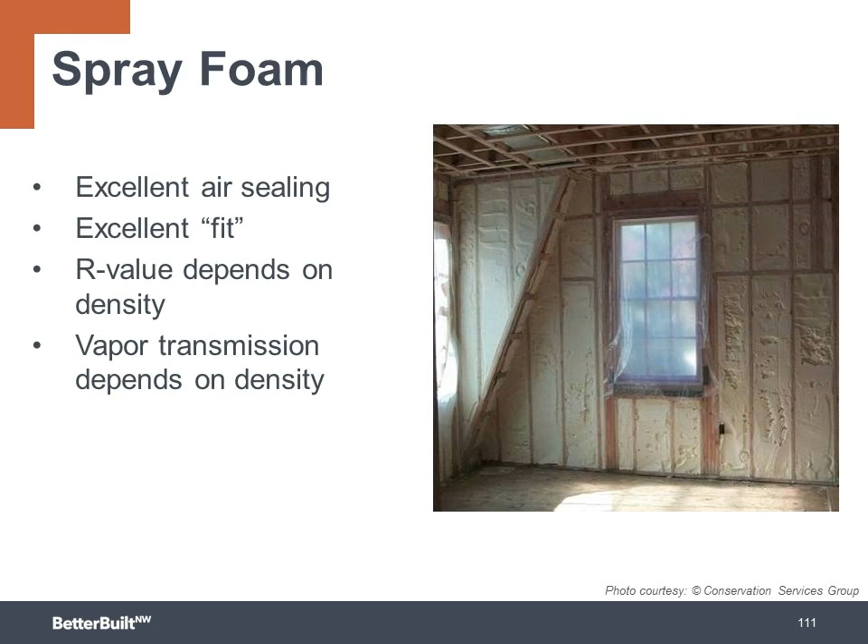And spray foam has been more typically used for whole house installations with higher budget projects due to its cost. There are two types of spray foam, low density and high density. The low density has an R value of 3.8 per inch, and it's vapor permeable. The high density has a higher R value at 6.8 per inch, and it's vapor impermeable. Once again, it's key to pay attention to these very different perm ratings. The low density provides drying potential, but the high density does not at all.

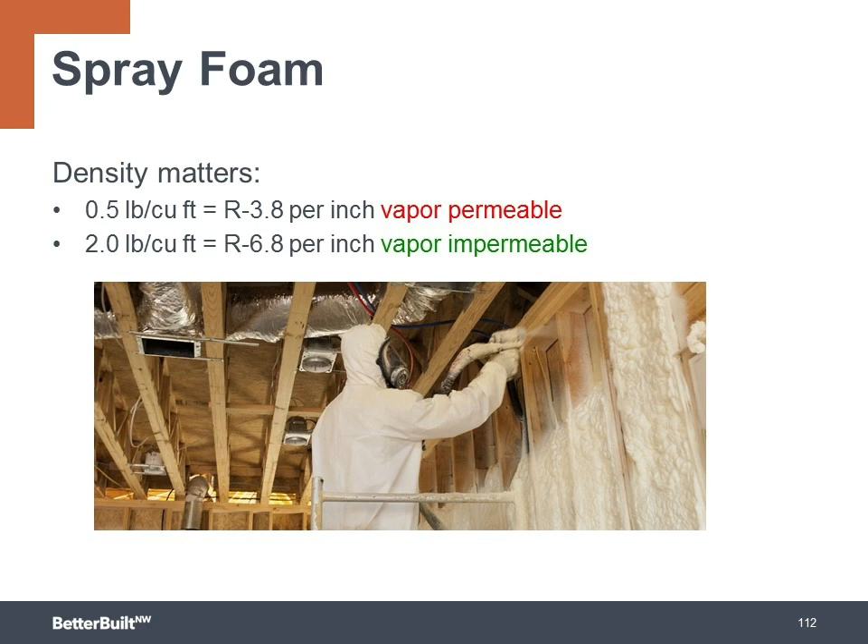That doesn't mean you would never want to use high density impermeable foam. It has its place, like in insulating a basement wall or building an unventilated and insulated roof to bring the attic into conditioned space. Spray foam can be a great solution for challenging areas of the structure to insulate and air seal.

Places like band joist areas, rafter and ceiling joists, wall intersections, and other places use what is called targeted spray foam. It can be installed at a more affordable price point by buying what is known as a froth pack, which is designed for targeted applications.

Spray foam can also be used in combination with batt insulation to do what's known as a flash and batt install. Two to three inches of foam are sprayed into the stud bay, and then the batt fills the remainder of the cavity. The spray foam insulates and air seals, and if the air seal from the foam is done well, then the batts work okay since the voids do not have a source of air. This allows the use of spray foam at a more affordable price point.

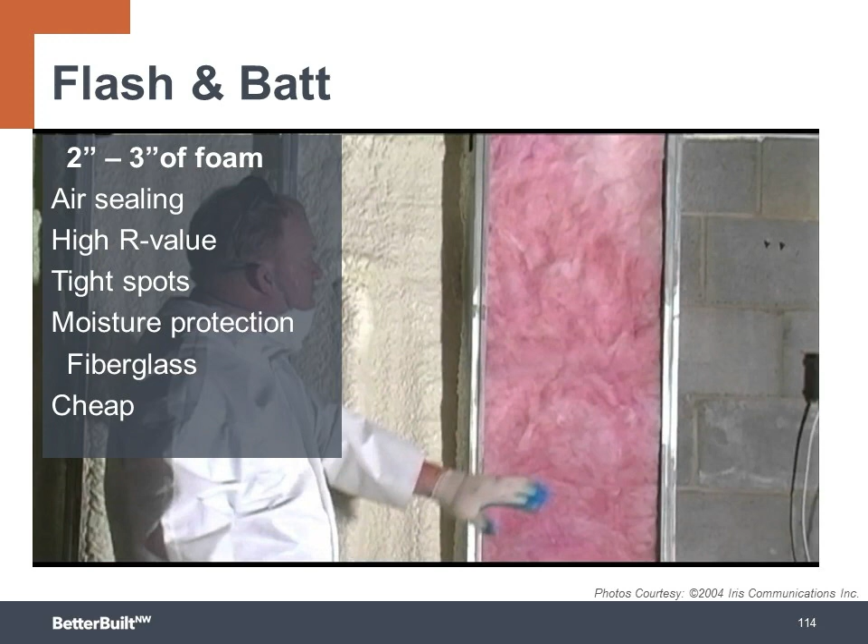Aside from cost, some builders avoid this product because many spray foams have a very high global warming potential due to the type of gas used as a blowing agent.

Not all spray foams use blowing agents with high global warming potential. There are foam manufacturers that have developed very low global warming potential agents, so there are choices for spray foam to have a more positive impact on global warming.

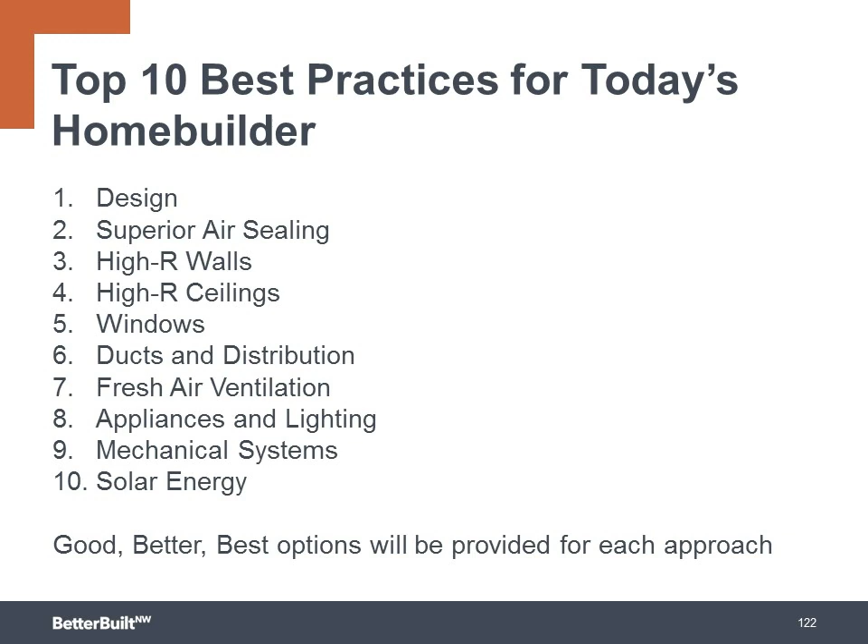So we've covered why we want to build high-performance buildings and the building science of what we need to control, so now we're ready to get into the how to achieve high performance. We're going to start looking at 10 categories of high-performance buildings. As a quick reminder, we'll look at examples of materials, techniques, strategies, and equipment organized into good, better, and best categories, each of which can be thought of as a progression of more energy saved with each level.

Number one is design for efficiency. Buckminster Fuller, a famous 20th century architect and visionary, said that the best way to predict the future is to design it. As builders, you have a great profession where the work you do has a direct and lasting effect on the future. Not everyone can say that about their work. You also know that good design and planning leads to more successful projects and better profits. So of course it's true that good design and planning will go a long way towards helping you build high-performance homes. So what do we want to do to design for efficiency?

At the good level, we want to build with a continuous thermal boundary. To take it to better, add right-sizing of design and systems. And then at the best level, add optimization of the design with energy modeling.

A continuous thermal boundary is simply making sure that the boundary between conditioned space and unconditioned space has no gaps at all in the insulation or air barrier. As the geometry gets more complicated in a project, the likelihood of having a gap in the boundary increases. Additionally, it's crucial that the air barrier aligns precisely with the insulation at the thermal boundary in order to protect the insulation from degradation of its performance and R-value. We'll talk more about this in the next section on air sealing.

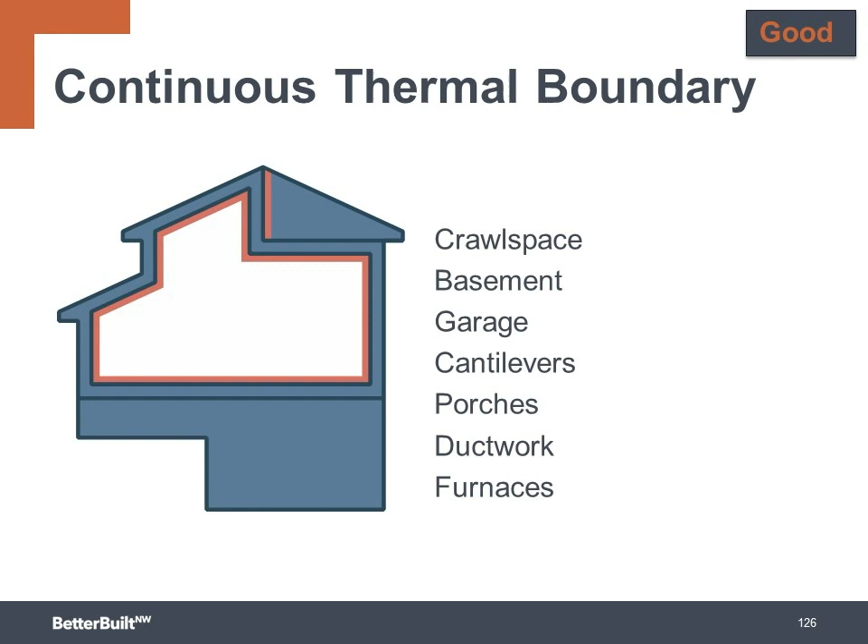In our heating-dominated climate zones, we want to optimize our design for solar gain in the winter. So when possible, design the largest area of windows facing south to capture the free solar heat in the winter. To optimize south-facing windows, they should have a solar heat gain coefficient of greater than 0.6 to maximize solar heat gain during the winter, a U-factor of 0.3 or less to reduce conductive heat transfer, and a high visible transmittance for good visible light transfer.

Good design also includes locating rooms that are most often occupied and have the greatest heating and lighting requirements to be along the south face of the building when possible.

At the better level, we want to minimize energy loads and right-size the building and the systems. That means minimizing envelope heat loss and gain, keeping the window to floor area ratio as low as possible, minimizing air infiltration, and on the conditioned floor area, avoiding square footage bloat. If you can meet the needs of your customers with slightly less square footage, it makes a big difference in the overall energy needs of the building.

Then we want to optimize the design to capture the benefits from natural forces where we can. That includes solar gain and natural light, and taking advantage of the stack effect, which is when warm air rises within the building, so this can be used to help cool the building if you provide a place for the warm air to escape at the top, like operable windows or skylights high on the structure.

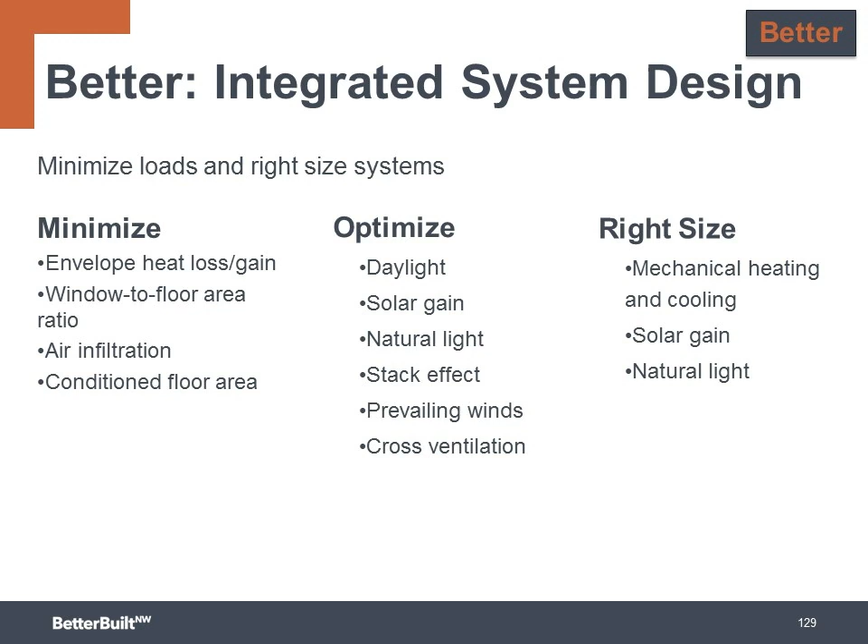Right sizing of mechanical heating and cooling systems will save on initial install cost and provide a system to the homeowner that will run to its optimum performance for comfort and lower operational costs.

To take the design strategies to the best level, you complete all of the steps in the good and better, and then you add energy modeling. This is running your plans through a computer simulation model that will predict how much energy the home will use during its operation. It's an analysis of heat loss, heat gain, air leakage, and mechanical efficiency.

It assumes typical occupant behavior and a typical number of people living in the home. You can analyze different upgrade measures to select the optimum package, design and meet your customers' needs, and of course, keep the design in the right price point.

Contact your local energy rater verifier, who can often provide this service for you.

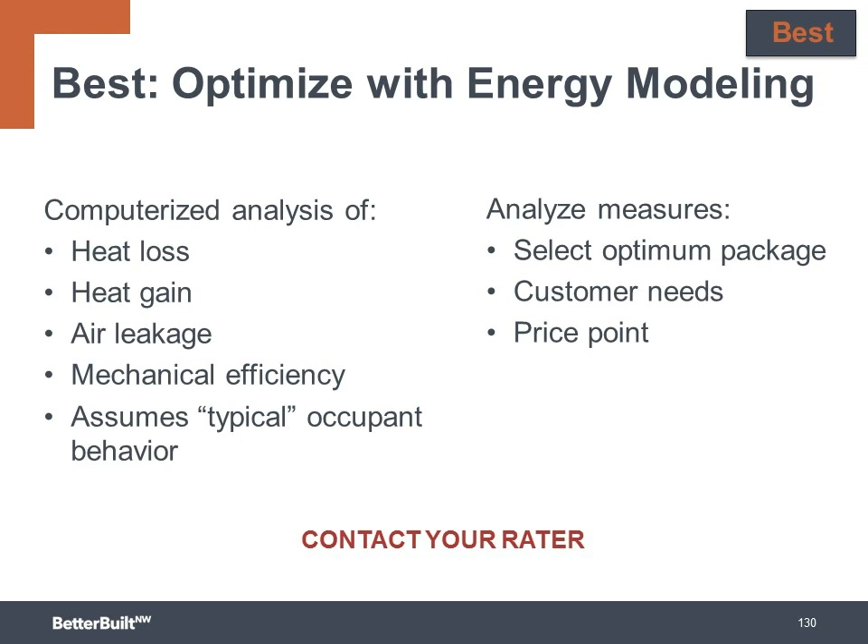The energy modeling will give you the ability to, in effect, turn the knobs up or down on your upgrade levels. Some of the elements you can analyze and adjust are the shell measures of insulation, the amount of air sealing, and the number and type of windows.

On the equipment side, you can adjust the heating and cooling efficiency, the water heating efficiency, and solar can be modeled in these energy models to predict how much electricity could be produced to partially or fully offset the energy used in the home if you're trying to achieve a zero energy or zero energy ready home.

Our second top 10 best practice category is superior air sealing.

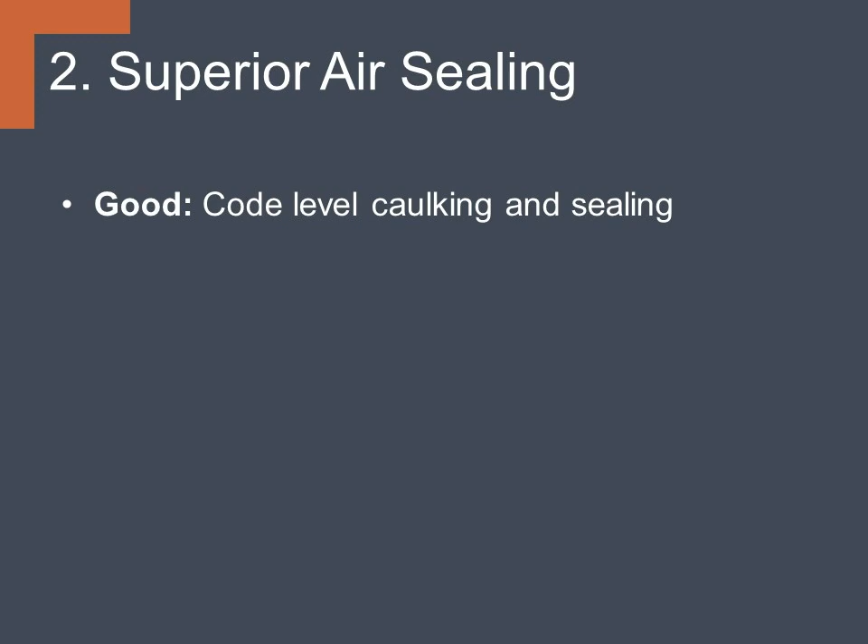At the good level, we're looking at code level caulking and sealing. To take it to better, adding a fully continuous air barrier. And for the best category, exterior sheathing sealed to move the air barrier to the exterior.

Air leakage can account for up to 30% of heat loss in a typical home. It can degrade the insulation's ability to resist heat flow, and it can move heat directly by convective heat transport. It can also transport moisture, reduce comfort levels, increase air pollution, and be one of the largest causes of ice dams.

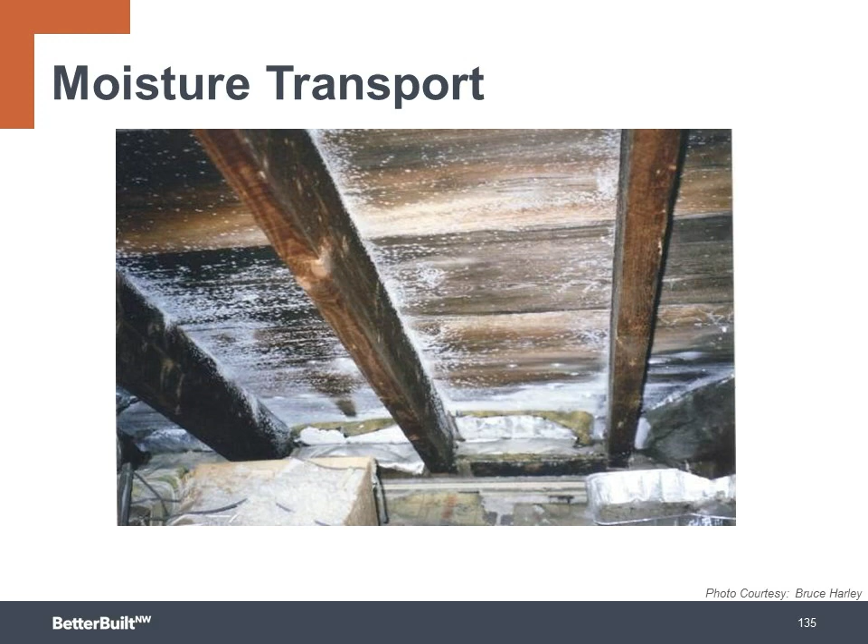Here we see an example of how air can transport moisture into an attic. Warm moist air is flowing up through the walls and onto the bottom of the roof deck, frosting up the rafters. Ice dams happen once in a while here, particularly east of the Cascade Mountains in climate zones 5 and higher.

Warm moist air flowing up a wall or through ceiling gaps and holes, along with low levels of attic insulation, which can also contribute to heat making its way to the underside of the roof, causes the snow on the roof to melt. It then runs down the roof until it refreezes at the cold eaves.

The ice can then work its way up under the shingles and even enter the attic in really bad ice dams. This, of course, can now remelt into the attic and down into the living space, causing a real mess.

The best fix is to air seal and insulate the attic so that the snow does not melt from internal heat loss. You solve energy waste and solve the ice dam problem at the same time.

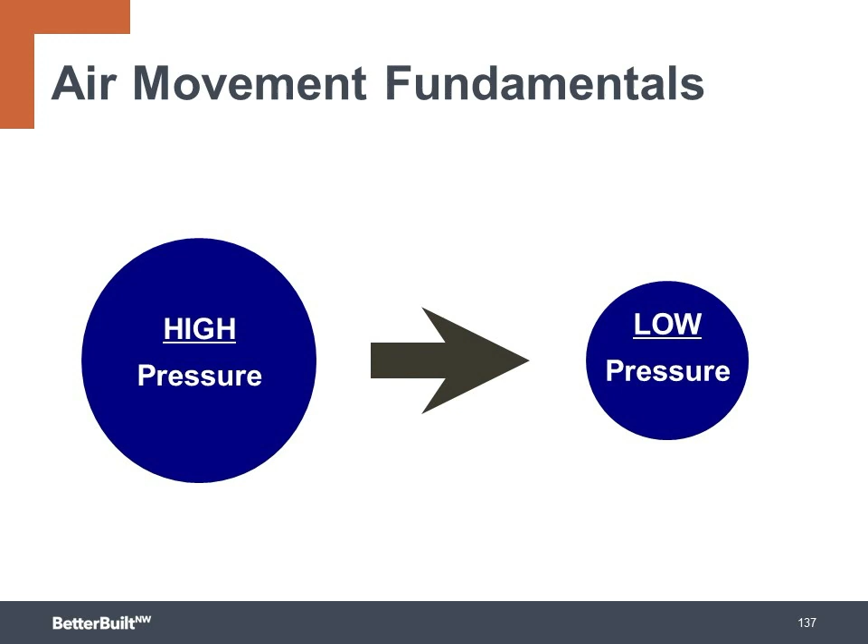Air movement, as we covered earlier, is governed by one of our fundamental principles: it moves from high pressure to low pressure, and those pressure differentials will always even out over time. So what causes these pressure differences to be higher or lower in the first place? There are a number of things that cause pressure differentials almost daily in our buildings, and we call these driving forces.

One example of a natural driving force is what's known as the stack effect, causing high and low pressures in the home. In the winter, as air molecules are warmed by the heating system, they rise up through the structure in the same way gases move up through a flue vent or a smokestack — that's where the name stack effect comes from. The rising warm air creates a high pressure zone relative to outside, high in the building at the ceiling plane and upper portion of the walls, and a low pressure zone at the lowest floor plane and the lower parts of the walls.

So during the heating season, the stack effect driving force creates these pressure differences, and if there are leakage paths, air moving from high to low will pull air into the home at the lower openings and push air out of the home through openings higher in the building.

Near the mid-height section of the building, there's a place where the negative pressure switches to positive pressure, called the neutral pressure plane. It's the same pressure inside as outside at the neutral pressure plane, so there's no driving force. In single-story buildings, this usually happens around chest height, where the windows are located.

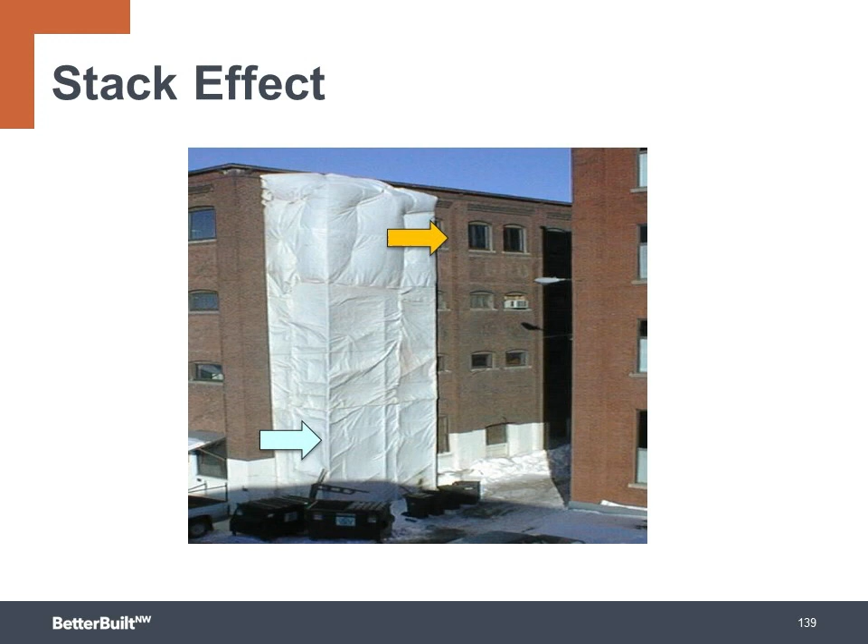Wind is another natural driving force that will cause high and low pressures. When it's blowing outside, the windy side of the house will experience high positive pressures relative to inside the conditioned space. On the leeward, opposite side of the house, protected from the direct wind, the house will experience low, negative pressures relative to inside the conditioned space.

Driving forces can also be introduced by our mechanical systems, more specifically our forced air heating and cooling systems. The fans driving these systems are powerful and can create areas of positive or negative pressure within the home. One way this happens is when there's no clear path for the supply air to get back to the return grille — this usually occurs when people close internal doors to bedrooms.

The bedroom behind the closed door will become positively pressurized relative to outside, and the zone where the return grille is located, in the rest of the house, will go negative. This can cause air in the bedroom to flow through cracks and gaps, possibly driving moisture into the building assembly along with the air. In the main body of the house where the return grille is located, the negative pressure can then draw air in from cracks and gaps from crawl spaces, attics, or outside into the conditioned space.

The other way forced air systems can get out of balance is if the ductwork is leaky, and the ducts are located outside of the conditioned space, which they often are, being in attics, basements, and crawl spaces. The air leaks from the ducts throw the system's delivery and return pressures out of balance with respect to each other. This can create driving forces across the entire conditioned space, either negative or positive, depending on whether the leak is located in the supply ducts or the return duct.

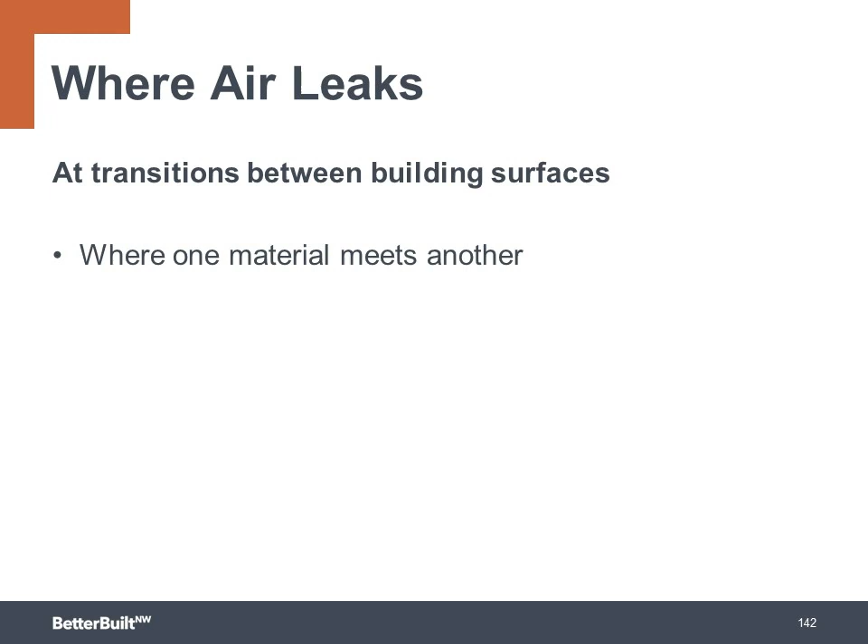Air leakage occurs at transitions between building surfaces where one material meets another, and at intersections where walls, floors, and roof lines meet. It also happens in empty spaces within walls or other building assemblies hidden by drywall, such as chases for a fireplace flue stack or for ductwork moving between floors. These are classic spots where air can find a clear path to move from one level of the building to another, following pressure differentials created by the driving forces.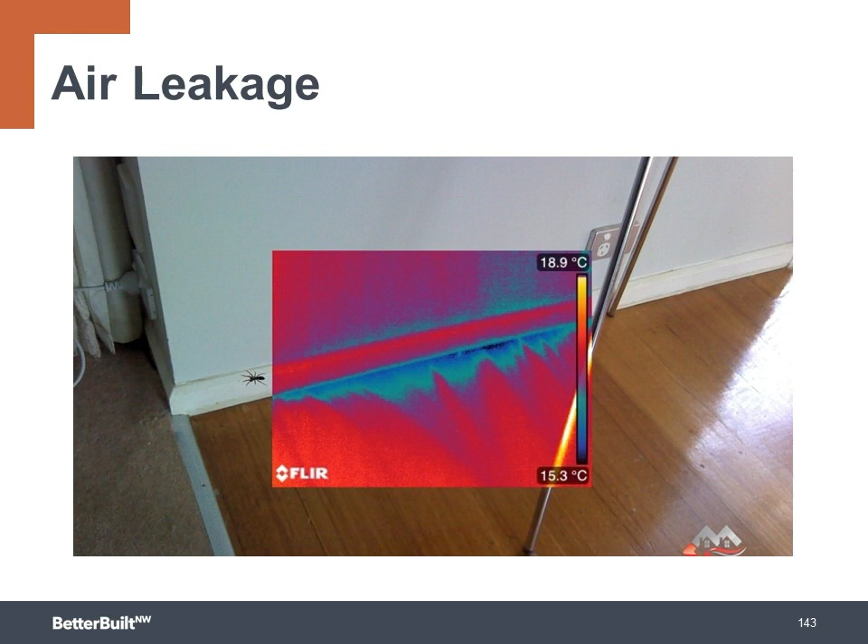Here's a great example of where the wall plane meets the floor plane and the wall plate was not sealed to the subfloor. Air is flowing in, and in the IR image the blue color indicates a cooler airstream flowing right underneath that baseboard trim. This is where we want to use either a sill sealer gasket to prevent this leakage, or some sort of flexible caulk or foam to seal that crack where those two planes meet each other.

Another typical leakage area is where duct boots, fan housings, or lighting and electrical boxes are cut through the sheetrock. When you're using the sheetrock as the air barrier, these penetrations need to be sealed with caulk, foam, or a gasket to close these paths for air leakage. This is also true for any penetrations cut through the subfloor.

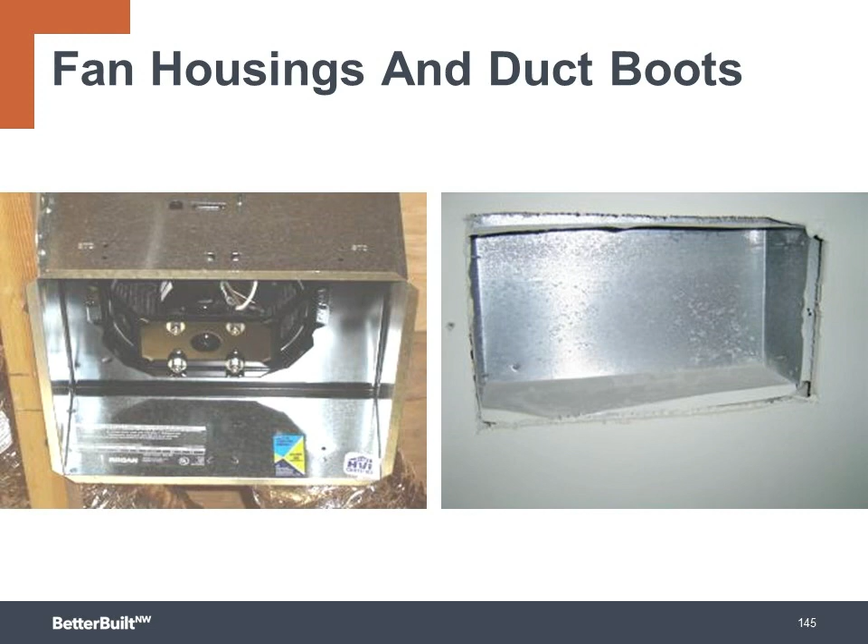So back to our good, better, best for air sealing. To achieve the good level, you simply follow the prescriptive requirements in your state building code. Or if you're working in a state without air sealing prescriptive requirements, you can find an air barrier installation list in the latest version of the International Energy Conservation Code, IECC, Chapter 4. All penetrations through the floor, ceiling, top and bottom plates, and wall cavities need to be air sealed with foam or caulk.

The rough openings around windows and doors also need to be sealed. Open chases need to be sealed at the top and bottom to stop large amounts of air movement, and this is also required by fire code. Using a blown-in insulation product in the walls can also provide a small amount of air sealing as a secondary benefit to the insulation itself.

At the better level, we air seal with the focus of creating a continuous air barrier with alignment to the insulation. This is essentially taking good air sealing strategy and using a checklist tool like the Thermal Enclosure Checklist, commonly referred to as the TEC. It was developed by the Energy Star for Homes program. If you use this checklist, it will help ensure there are no hidden gaps in the air-sealed thermal boundary.

One example in the TEC is that it prescribes adding a gasket to the top plate, as we see in the photo on the right. You can also use a bead of caulk between the top plate and the sheetrock to seal this common place for air leakage. As the top plate dries out, it shrinks and often opens a crack, which creates a path for air leakage from the wall to the unconditioned attic, and this gasket or caulk will help prevent this.

Other places you'll focus on at the better level using the TEC are behind fireplace surrounds and behind tubs and shower enclosures, by adding a rigid material, picture-frame sealed with foam or caulk at the edges, to keep a continuous air barrier running next to the insulation. Traditionally, the insulation is open and exposed behind these areas.

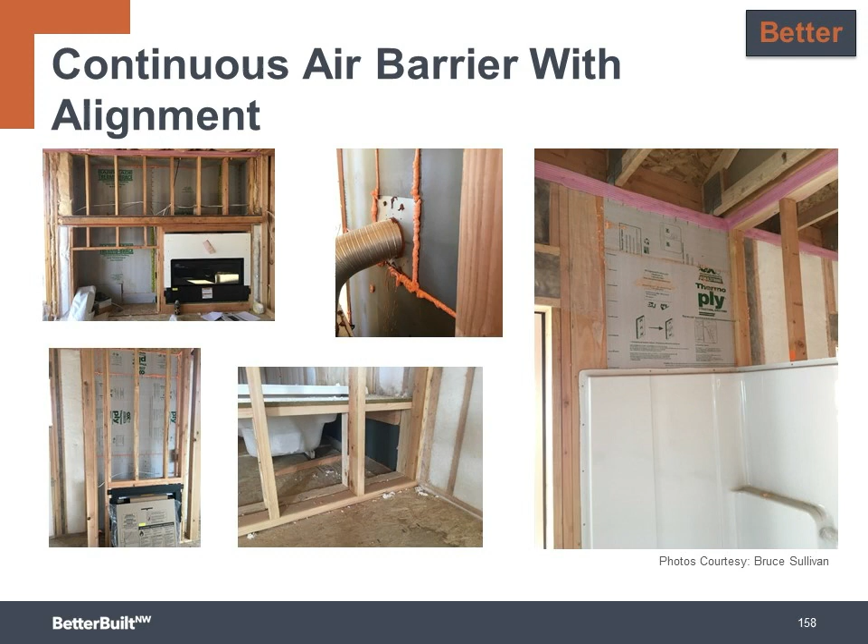The air barrier must also be continuous behind soffits, again so that it's touching and protecting the insulated cavity. You also want to make sure you have a continuous air barrier under and behind staircases, and on the back side of cathedral ceiling knee walls that face the ventilated attic. These short triangular walls on top of interior walls are essentially exterior walls dividing inside space from outdoor air and temperatures.

Skylight well shafts can be very tricky to create a six-sided air-sealed wall cavity to protect the insulation, particularly when framed in using flat truss members. The typical solution is to use rigid foam insulation as puzzle pieces to fill in these triangles and get the needed R-value. The rigid foam is not vulnerable to air infiltration from the attic, so it's a good way to tackle this problem.

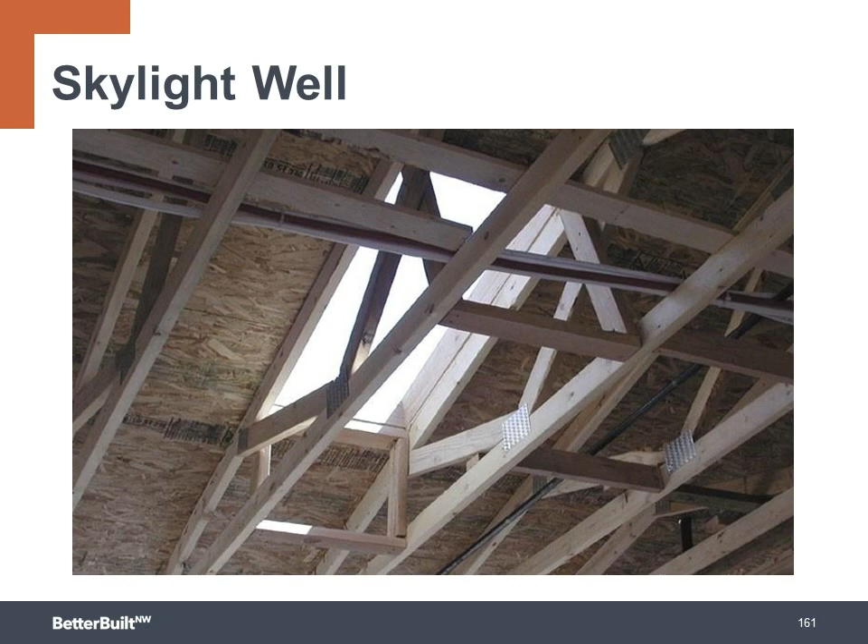Alternatively, using tubular daylighting skylights can be an even better way to light a dark space because you can get an air-sealed and insulated type of tubular skylight that provides good light with a smaller area, resulting in less heat loss, and of course no challenge dealing with the shaft air sealing.

The TEC will also address the common knee wall problem that we looked at earlier. Blocking will be installed with air sealing around the edges to protect both the floor cavity and the top of the knee wall from any air infiltration. A solid sheeting material is also installed on the back side of the knee wall to create the six-sided box that protects the insulation.

If you're currently installing FSK paper in places like behind tubs and fireplace surrounds for fire code, you'll want to cover it with a solid sheet material and picture frame seal around the edges for a robust continuous air barrier that'll last over time.

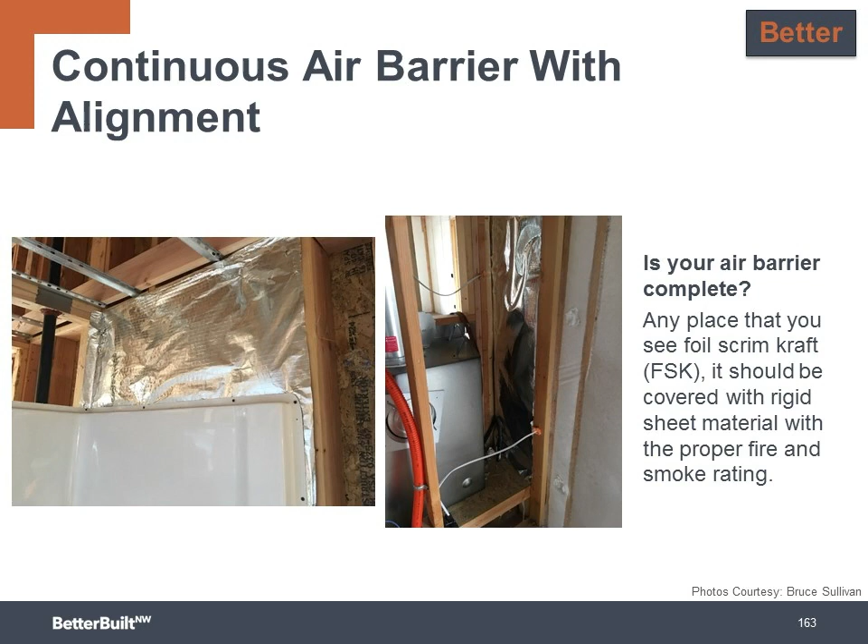Taking air sealing to the best level, there's a couple different approaches you can take. The first is to add a second air barrier to supplement the first one at the air-sealed drywall. Here we see an example of adding a second air barrier on the exterior by using a specialized tape to seal up all the seams and cracks on the outside of the building. This is the belt and suspenders approach because you seal both sides of the wall.

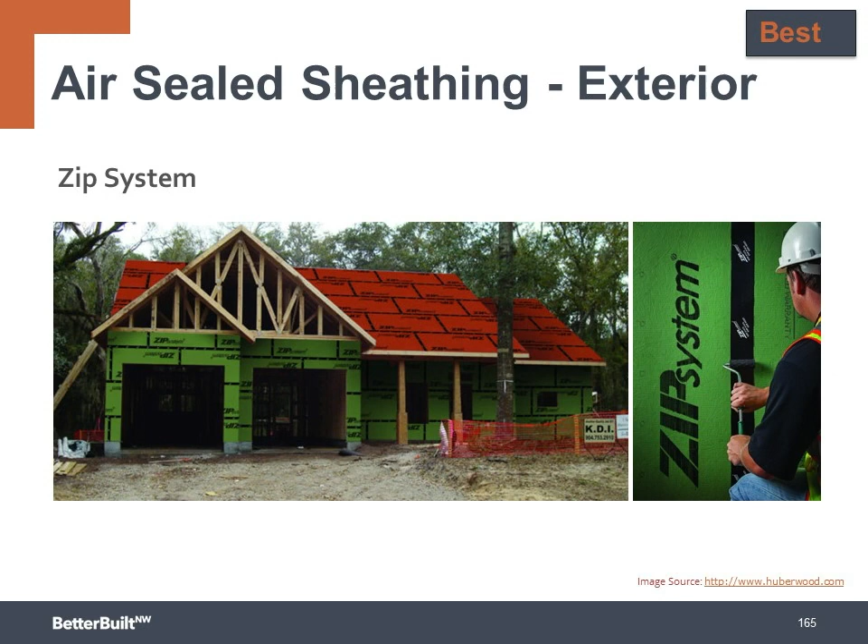There are some manufactured products like Huber's ZIP wall system that create a robust exterior air barrier, as well as a weather-resistive barrier and structural sheathing all in one. It also uses a specialized tape for sealing up the seams. Another example is Henry Blueskin, which is a self-adhering weather-resistive barrier that also provides exterior air sealing.

Many Northwest builders are having good success with liquid-applied weather-resistive barriers to lower their air leakage numbers significantly. These products can fill in all the seams and gaps to protect the walls from liquid water, and this also does a great job at creating a tight exterior air barrier.

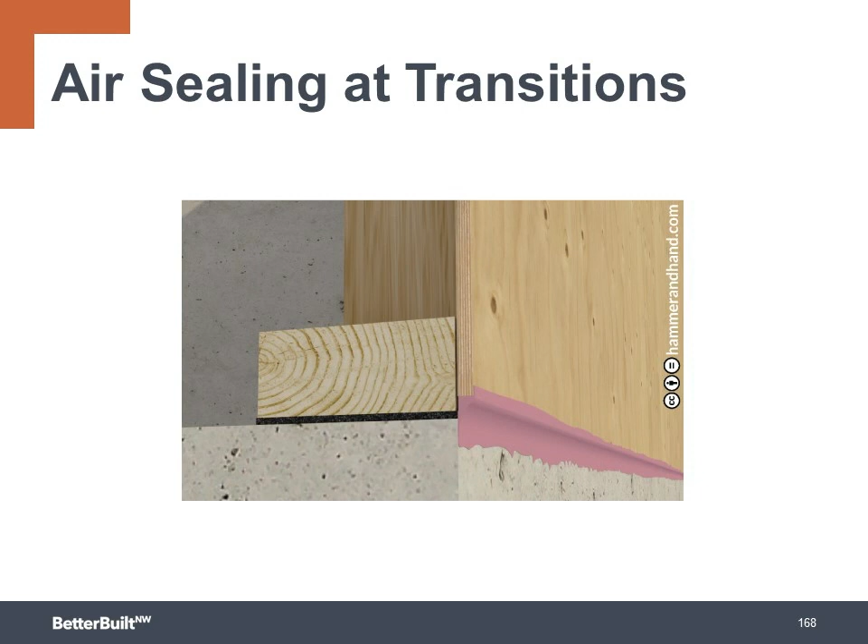One key detail when you go with an exterior air barrier is how to tie it into the air barrier at the floor and ceiling planes, in those transition zones we talked about earlier where air leakage often happens. At the foundation, you want to make sure the air barrier connects to the foundation. You can use a liquid-applied sealant, air sealing tape, or flexible flashing—basically anything capable of adhering to both wood and concrete and that is air impermeable. Some products will require a primer to improve that adhesion to the concrete and wood.

At the top of the wall, the air barrier needs to round the corner and tie into the ceiling plane to be continuous. One solution is to use a wide strip of the weather-resistive barrier or a similar air barrier product to wrap around the corner. The material apron temporarily hangs down over the inside of the wall and then is tied into the ceiling air barrier after the trusses are installed.

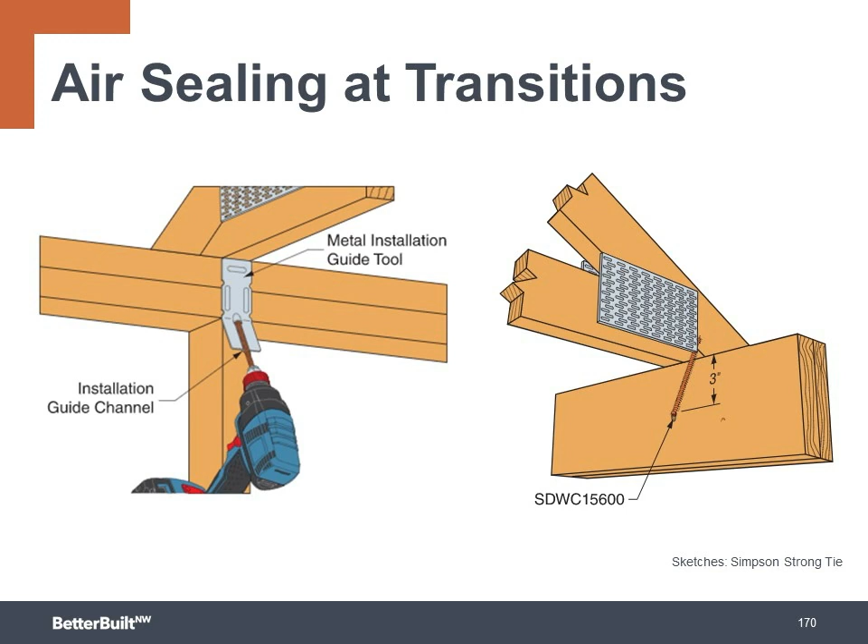But how do you install the trusses without having to cut this air barrier to ribbons for the hurricane clips that secure the truss to the top plate? One of the easiest solutions to this challenge is to use truss screws. Simpson's Strong Drive truss screws or FastenMaster TimberLOK wood screws are two examples that can attach trusses or rafters to a double top plate via a screw driven at an angle from beneath the top plates into the trusses or rafters. This code-approved methodology eliminates the need for hurricane clips and avoids a potential air sealing nightmare.

Some builders are taking the ceiling plane to the next level by using taped OSB air barriers across the ceiling behind the sheetrock. This OSB air barrier on the ceiling extends over the top plates and ties into the OSB wall sheathing. The corner is air sealed with wide air sealing tape, self-adhered flexible flashing, or the WRB material.

A second approach to the best air sealing level is to add a dedicated layer within the wall to act as the primary air barrier. There are a number of fabric type air barriers and tapes which have proven to be very effective. Many of these products were originally developed as part of the Passive House movement in Europe. Passive House certification requires very tight air sealing, and these air barrier systems can deliver the results.

They're usually installed directly behind the sheetrock or within the wall in a dedicated service cavity just behind the sheetrock. Or if you're building a double stud wall, they can be installed inside the wall on the back side of the inner studs to protect the air barrier layer.

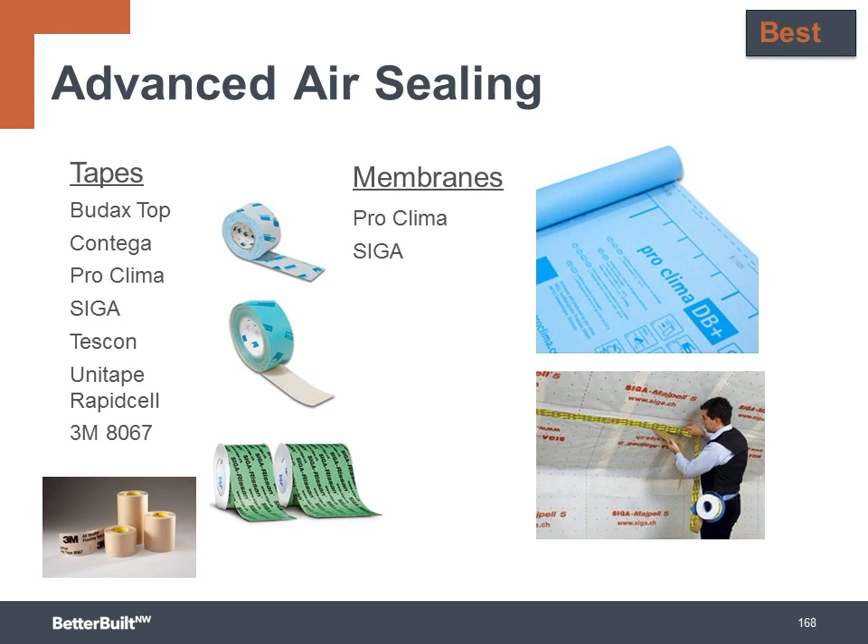Finally, we're also including a relatively new material and technique as an innovative approach to the best air sealing category. AeroBarrier is a flexible air sealant that is installed after the building shell is complete with windows and doors installed and the lid hung. It goes in as an aerosol mist while pressurizing the house with a blower door fan, which causes all of the air to flow from the interior to the exterior.

The small particles of air sealant flow with the air through the cracks and gaps across the entire building shell and then stick to the edges of the materials where the air is flowing. It builds up until it forms a barrier that seals up the air path. This can save labor costs of manually sealing up all of those pathways. The building gets tighter the longer the air sealing system runs, and you can simply order your desired level of air tightness.

So how do we measure our success with our air sealing efforts? Well, that's with a blower door. The blower door test is a service provided by your third-party verifier as part of certifications and energy efficiency programs. It works with a large, powerful fan which is set up in a doorway that pulls all of the air out of the building and then measures the quantity of air leaving the building through the fan. And this shows how much air is leaking in through the pathways in the building shell.

The test result is then measured in what's known as air changes per hour, or in other words, how many times will all of the air in the house be pulled out with the fan in 1 hour. It's a great tool to not only measure success, but it can also be used to find and seal leaks if pathways are accessible. It's used for both new construction and for energy upgrades in existing homes.

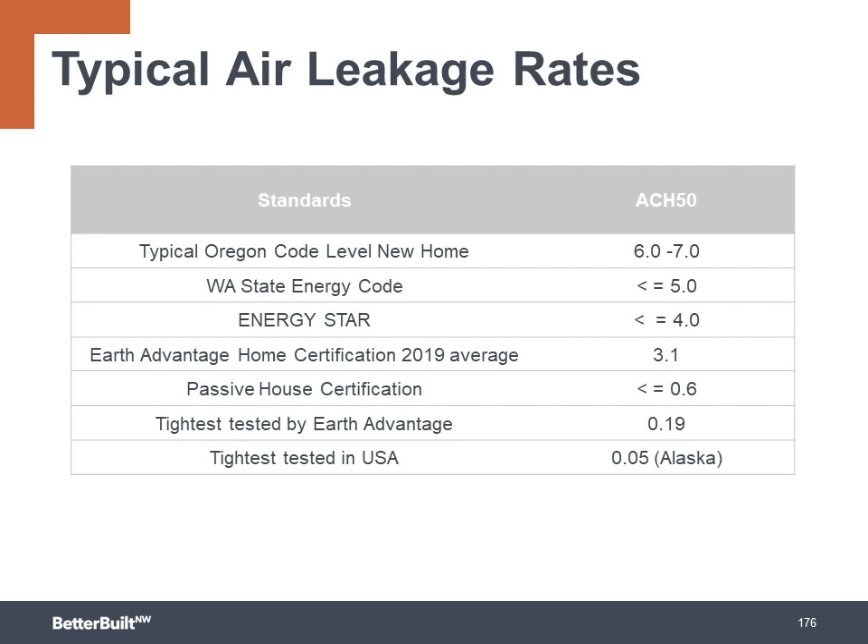So how tight is too tight when it comes to buildings? Many people are concerned with air sealing a home and creating either an unhealthy environment with stale polluted air or a building that's vulnerable to moisture and decay. As the old saying goes, buildings need to breathe, and that's usually followed by "I'll never build one of those tight houses." But this is a misunderstanding of building science and the goals of building tight.

Buildings don't need to breathe. Buildings need to dry out. And that's why it's crucial to build with materials that have high permeability to allow for drying for the long-term durability of the structure. It's people that need to breathe fresh, clean air. And that's why air sealing must be done in combination with installing a fresh air ventilation system, so the occupants don't get sick from poor indoor air quality.

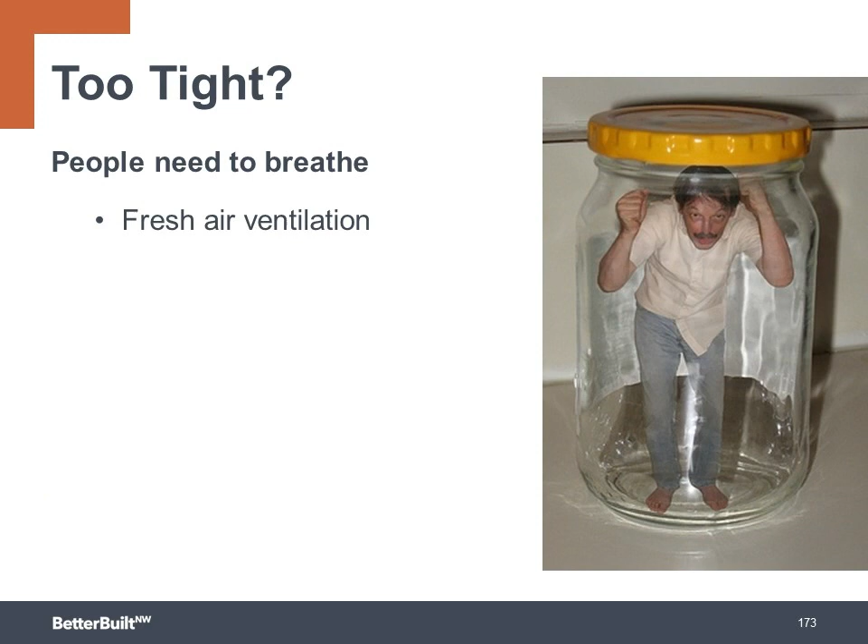If you have an older leaky building that quote-unquote breathes, what you have is random leakage from uncontrolled locations, and this uncontrolled air can bring more pollutants and more moisture into the building. So by air sealing the building, we take control. We stop random air movement and introduce a controlled ventilation system with the correct amount of air from a known clean location. And this is how air tightness improves ventilation, indoor air quality, and potentially durability by keeping out moisture when humidity is high outside the structure. We'll cover more about good, better, and best whole house ventilation systems in Section 7.